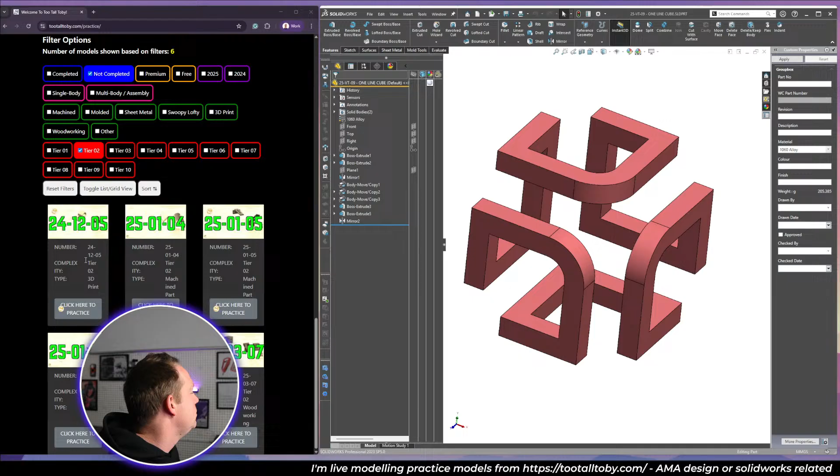Of course, when you're under pressure with time, it's much more difficult. Let me bring up the drawing, and I've got a screenshot here. So I had a go at all of these models as they were - I wasn't watching live, but I did watch it on a replay. And I had a go, and this was definitely one that I was not super quick on. But there's a number of ways to do it. I'm going to take you through my process.

May not be the quickest, but is definitely one way. The quickest way is to do sort of one section on the bottom and the side, and then pattern it, but that can be complicated. So the way I look at this, Gummy, if you're trying to do it in a speed modeling sense in the competition, just try and break it down into the simplest shapes and do it as quickly as possible.

Now, one thing I've noted since then, having a look at it, is you've actually got one side of the model that you could do - so if you see my cursor here, let's say this face. If you do that shape without the radius in it, you could then pattern that or replicate it in 6 different faces, and then just add the fillets to the 3 sides that are closest to you. That is one way of doing it.

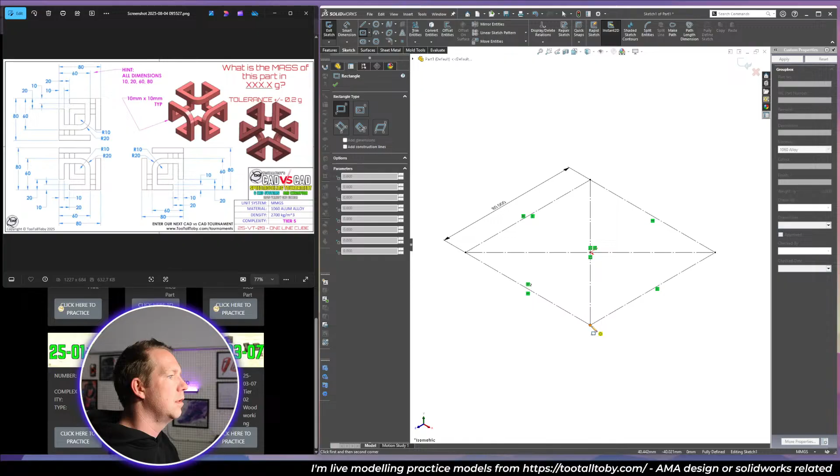One thing I will do is just draw the 80 by 80 square as a guide. I also need to pick a corner that's going to be my back corner. If we go to an isometric view, we can see that this corner here is at the back, which means I'm going to have a 60 by 60 from the front.

And I'm going to offset 10 millimeters, reverse, just to get that size. And then what you can see in the corners is that there's going to be a line here that is 20 mil off this edge.

Because we've drawn these lines, this center point rectangle, we've now got a construction line in the middle. We can use those to mirror elements. I selected the wrong tools there, let me just try that again.

Entities to mirror is this one. I'm going to mirror about this construction line, and then I've got my bottom sketch. Then I can extrude that up, select the contour, and I've got my first solid body.

Now at this point you can start to try and do something fancy with move copy, etc. Or you can just keep going and building, which I'm definitely inclined to do because it's going to be quicker in the end.

So I can then go to this side and do a 60 by 60 on this corner. We'll see how that matches up. And we're going to repeat the process: offset, reverse. All right, now we've got this edge here we can convert.

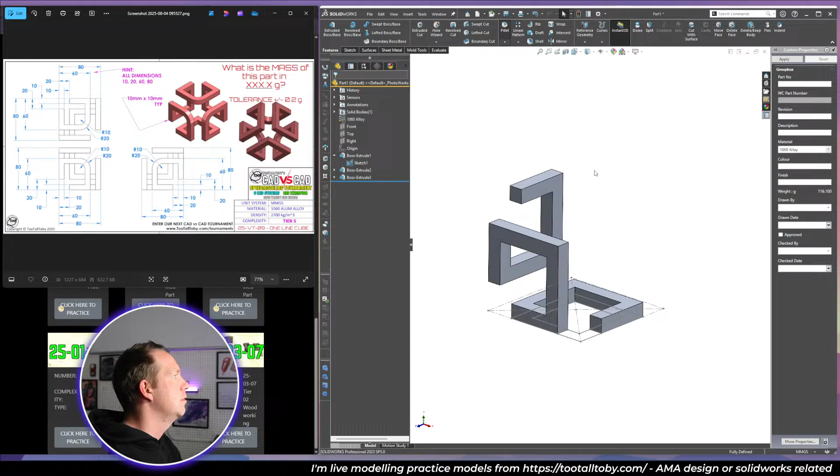Now we've come this far, we can do a fillet. So the internal fillet on this front curve here is 10, and then we repeat that for the outer, 20.

And then we're going to be at this point where we want to mirror. For this, we need a plane that's in between, and we can select mirror, plane, body, merge, and then all we've got left to do is the top shape.

Now your question, can we use thicken of 10 millimeters with inside radius, which makes the sketch simple? Yes, absolutely you could.

So if we went to this one here, you could just do the inside shape and do a thin feature. That is another way of doing it, and probably a lot quicker. As I said, there's going to be multiple ways of doing this one.

60 by 60, for instance, here, let me show you on this one. If we split, let's say I split it here and here. And is it going to join? Yep.

So I make that bit for construction, that bit for construction. So now I've just got this section. I'm going to extrude, I can change that to 10 millimeters. Merge. Okay, and then I've got a complete solid body.

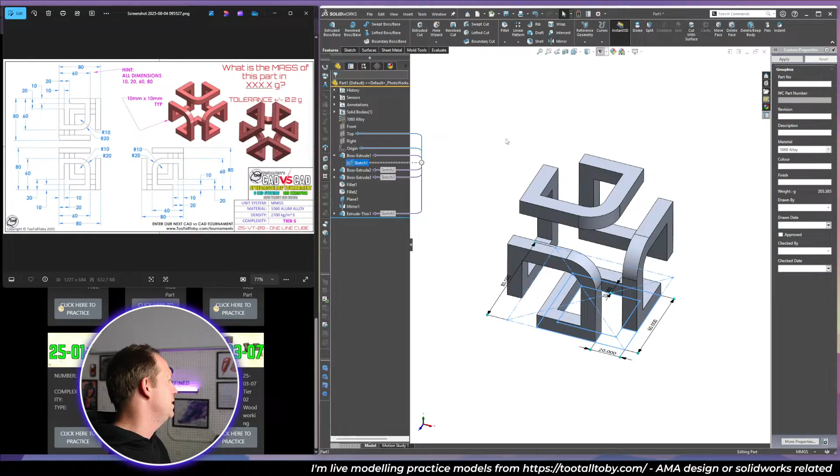Thin feature. Now, this is not, because it's just a model from the weekend's tournament, up as a practice model yet, so we can't go through and record and link a community tutorial or even do a speed run. So I'm going to save that. But yeah, hope you enjoyed seeing at least that sample, that example of one way of creating this model.

I think you're probably right that doing a thin feature will be a lot quicker for the whole thing. And I think, again, doing something that is going to revolve or use a pattern, so you only have to do it once and then you can pattern the whole thing, that's going to be quicker still. But in the heat of a speed modeling challenge, it's very difficult to work that out unless you see it very, very quickly.

Okay, let's move on to some new tier 4 models. There's lots of tier 4 models we haven't done, I've got 35 on the list. So if there were any requests, I'm happy to take them.

But otherwise, let's just start with this one here. 241116, a wall plate. Let's begin and reveal the drawing. So the way we work in this live stream is for all of our models, our first attempt is a practice run, a slow run. We're just trying to work out the best way to do it. After that, we'll come back, make some assessments, and then try to do a speed run afterwards to see if we can get the top time.

This one is plain carbon steel. And this one I have seen before. You'll see in the comments, the pink notes from Toby, it did not finish. I think this was one that I did, and I made some mistakes.

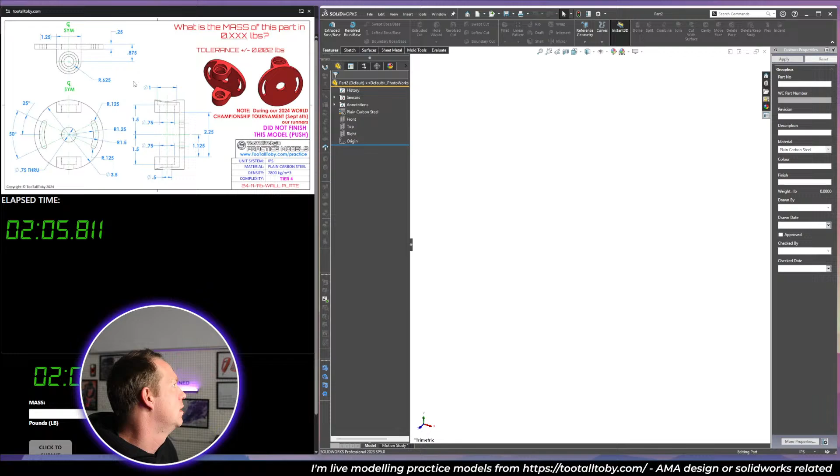All right, so let's have a go at this. Our easiest way to start is from the top, because it's a very simple kind of sketch to start from. You get 3.5 for the outer, 0.75 for the inner hole, and then you can do the slots. Now there's elements of this that you can do in symmetry, but then it's those final holes that need to be done individually. Depends on the prize.

That's very good. What's it going to take? What do you need the prize to be for you to enter? It's more about the prestige, I think.

All right, so the slots. You can do, there's a few ways you can do the slot. A center point arc slot is probably pretty easy to do, something like this. And then I can tweak the dimensions. You can see that the center radius of it, it actually doesn't, it's a bit annoying here. The dimensions don't tell you that radius to the center line, they tell you the two inside and outside. So I can delete that and dimension this one and make that 1.25.

Is that right? Yeah. And then the radius here, well, that is going to be 0.125. And then I want to make this horizontal. I might have to use a construction line for that. Okay, so there's my one slot on one side.

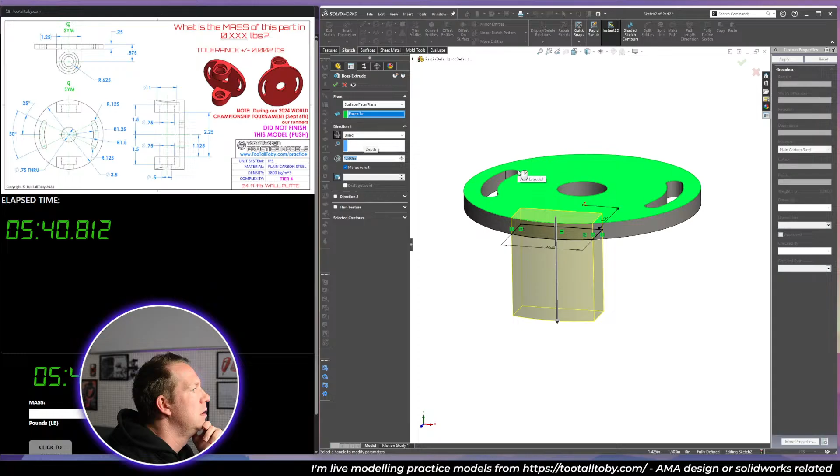And then I'm going to use the measurements that we can see on the top, which is 2.25 between them. So I can go here to here, 2.25 divided by 2, and then the width you can see is 1.25. And then I can extrude this, and the total height, well, the height to the center point is 0.875, but from the top face, and then a radius of 0.625. So if I want to work that out a bit easier, I can start the sketch from there. I can go 0.875, plus 0.625, and that gets my full height.

And then on this point, a very easy way to do this is a full face fillet to get the round shape.

Now, if I try and mirror this feature and that face, that works fine, so that step is okay. And then we have to do our holes. So there's a few ways we could do the holes.

The easiest way is just a couple of cut extrudes. I'm inclined to do a revolve cut so we can do the whole thing in one go. So what that means,

I'm going to draw a line in the middle, which is a construction line. And then I'm going to look at the holes, looking at this side view, and I'm going to say we're going to have one that comes to the edge. It's going to start quite skinny, come in and then get wider all the way through. And they're the same, 0.75. And that comes out, gets wider still, comes in, back to the middle, join all the way up.

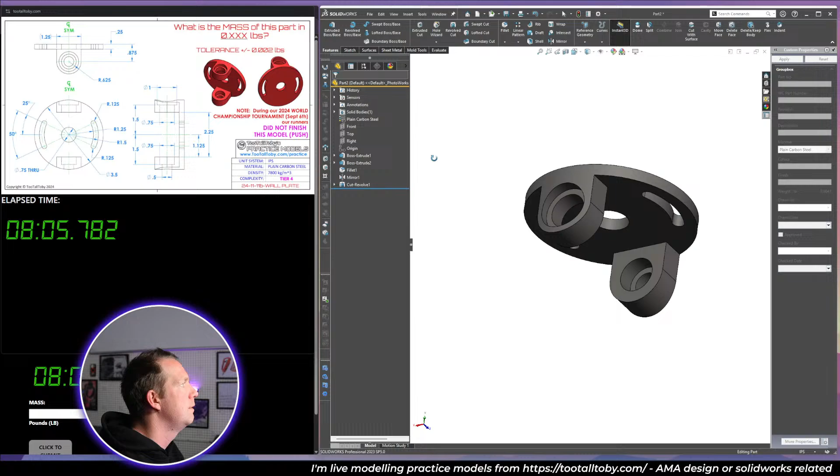And then the depth, you can see that from here to here is 1.5. And here to here is 1.5. With that shape done, I can then do a revolve cut to remove all of that in one go. And if I've got it correct, then this should be the answer, 0.904. There we go.

All right, submit that time. And we'll save the model. This is a practice model. Wall plate. It is red.

What did you guys think of that workflow? I think there's a few things that we can definitely tidy up. I think the color's a bit light, a bit dark. All right, let's

Let's see what we could do better now. Or let's have a look at if I've got the file from my World Champs entry. It should be here. It's called a wall plate. You can see that one.

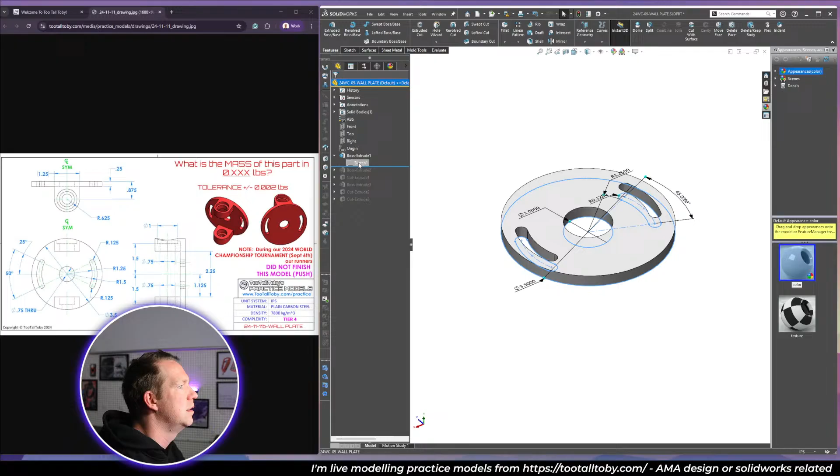So what I'm opening here is the first time I built this. And you can see the method I used when I was doing it live the first time was very, very similar. I did the outer shape, extrude, and then I did one shape here. I did this one differently. I did it from the center and extruded out. And I put that 0.5 mil hole in there. Not sure if that's the right way to do it, but then I did a cut going through.

This could be pretty quick, which could be very quick. Probably quicker than sketching the revolve cut. There's a number of holes, a number of things you need to select. But that can all be driven from one sketch if I put the other holes inside it. So I think that might be a good way of doing it. And I think on the top, I think doing all that in one sketch and just mirroring the sketch is going to be pretty quick too.

So let's just tweak our model to get to that level. So we're duplicating the process, which means I'm going to scrap these elements and go back to the front view and scrap that one. So I'm going front and then I'm sketching.

We could do a slot, that will be pretty quick. So I want to do a slot for this section. That way I can put these dimensions in very quickly. Can also select and convert that edge. And then we want to put our holes in. Now for our holes, we've got 0.5, 0.75, and 1. So that's the sketch we need to do.

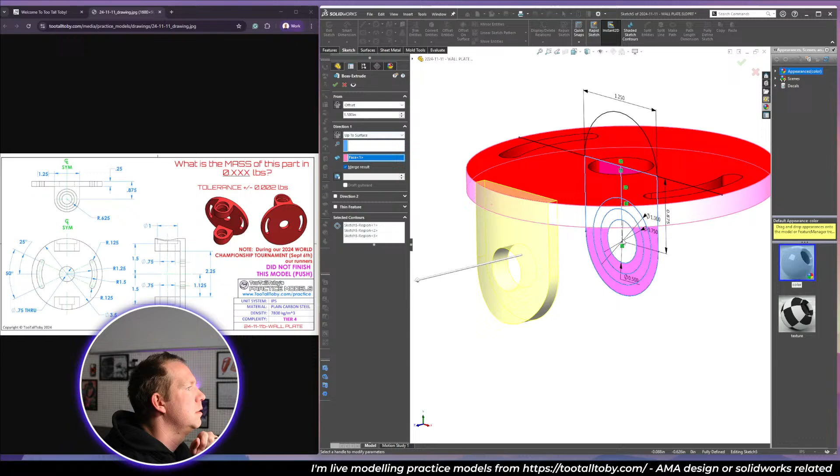And then I'm going to do an extrude. I'm going to select those 3 contours. I need to go offset 1.5, and I want to go up to surface. And something's gone wrong there. Yeah, it's offset not 1.5, it is 1.125. So we do it like that. That's one way.

Then we want to do the same the other way, except we're going to select some different contours. Just going to select those 2. Offset up to surface this way. Flick that direction. And you can see I've done a bigger hole on that side.

And so then we need to do 2 cuts. So this is more complicated, but if you're quick enough at putting and getting the correct dimensions in, it should be quicker. Need to select both those contours. Now, have I got them right? Got 0.5 and then I've got 1. That's not correct. I need a 0.5 and a 0.75. So I just selected 1 contour too many.

So it should look like that. And then on the other side, I need to do the biggest one. Offset 1.5.

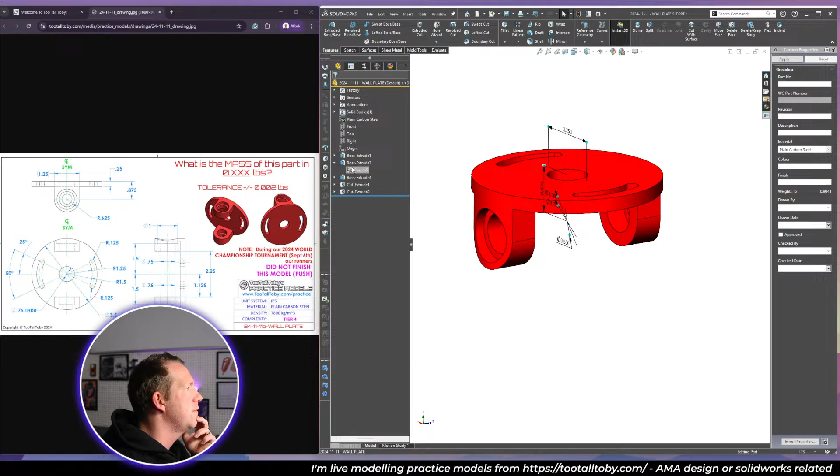But I don't know about you, I feel like the sketch is quick, but the process is going to be slow. Anyway, let's give it a go.

We'll see the time to beat. Time to beat is 3 minutes 30. Gummy, you're up there, mate, 4 minutes, not bad. Rich Pan and Matab. Oh, let's beat that.

All right, so it's plain carbon steel, pounds. Start our file, we're going to try again, and here we go for a speed run. 3, 2, 1, and let's go.

All right, top. 3.75, and then our slot. Now I didn't do arc slot, which maybe I should have. I just wanted to dimension the internal one, which was 1.25. This one being 0.25, and I feel like I've done something wrong here. The outer side is 3.5. That's what I did wrong.

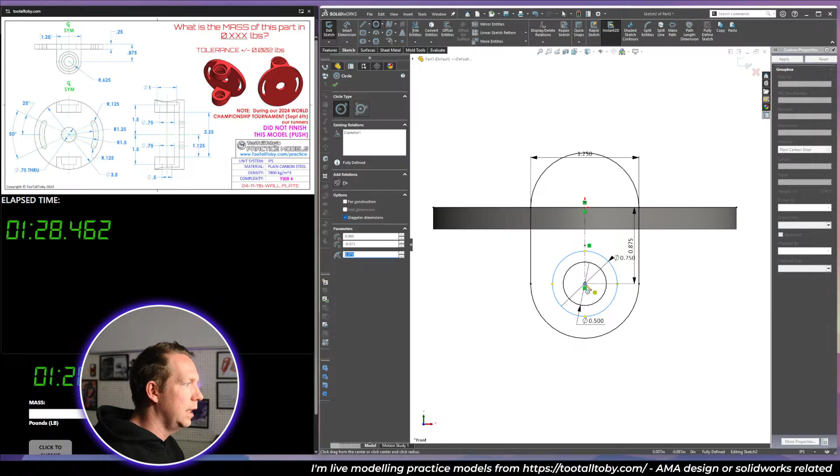Click that, and done. Then I've got to get my cuts in. So this one has small cut on the outside, big cut inside. I'm selecting these ones, and going blind 1.5. Okay, and then I'm doing the second one. I'm going to select all those contours through all, offset 1.5.

And I've got something wrong. What's wrong here? And this is going to slow me down. Small hole, that one's too big. So I selected one more contour than I needed to on that one. That's the trick.

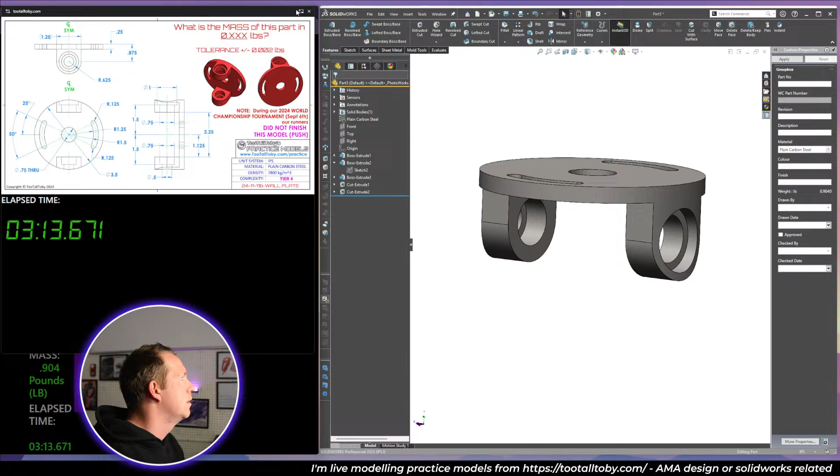904. 3 minutes 13. Sketch, extrude, revolve. Yeah, all right. I think we've got the quickest time, but it wasn't that fast, and I dare say a lot of you guys could probably beat that.

But we'll move on, don't love this model, but it's okay. How'd you guys go? Anyone do a good time on that one? Love to see you beat me in the times there. Let's jump on to the next one.

Back to practice models, and we go down to not completed. Let's do a tier 5 where there's 22 models we haven't done. That's plenty. And let's pick a woodworking one, something different.

Rich Penn had done a video, speed modeling. Let's give it a go. All right, red oak, inches. Annoying, multi-body part, it's quite a bit of detail on this.

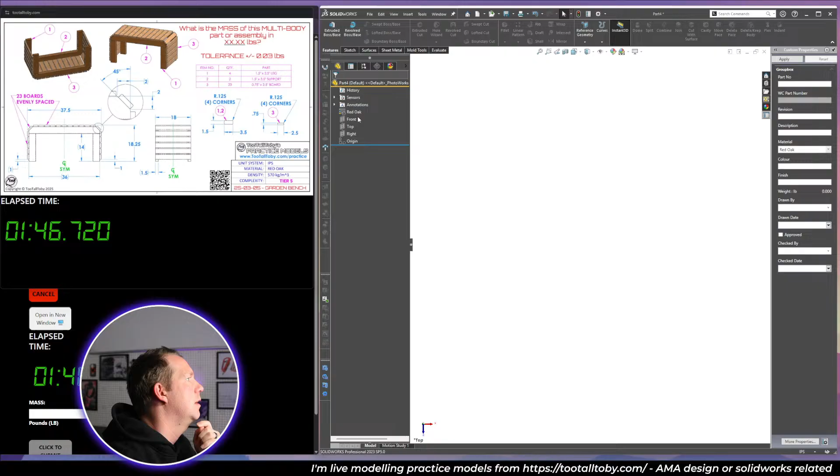I'll probably start from the center out. So I do the height to the timber leg, because I want to do the frame first and then do the multi-body like planks afterwards. But we can see we've got the dimensions. It says 18.25 to the very top.

The boards are all the same thickness, so I could actually do the inside, which is 14. And then the width, 36 minus 3.5, 18 minus 3.5. That's the inside shape.

So I could just do that. Then I could extrude and do a thin feature and do it blind. Now the thickness is 1.5. The width is 3.5. And we want to offset it.

18 and then come in. Yeah, doing it a quarter, that's the way I'm thinking of doing it here. Right, so we get that corner section done. And then we can do that chamfer, and the chamfer we can see is 2 by 2. So I can select that edge, do a chamfer, make it 2. That section's done.

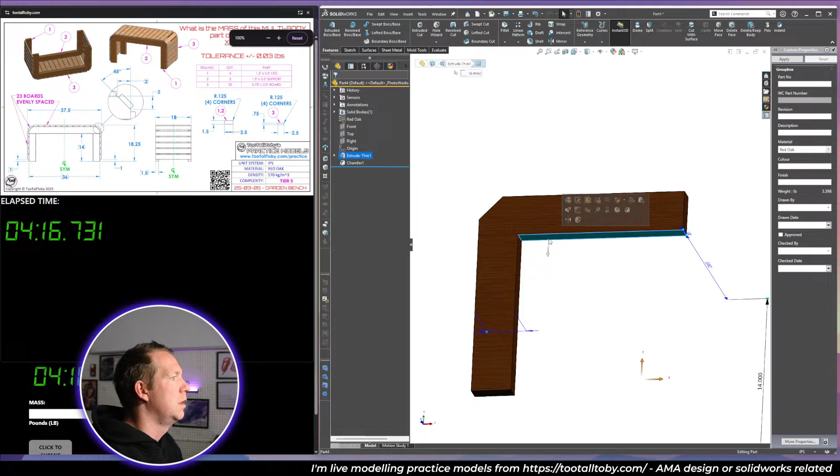So in fact, you do need to separate them. In which case, I would split, cut, separate, and then put some fillets in. The corners are 0.125. And I just select all 4 like this. Okay, and then repeat it on this one.

I'm not sure if there's fillets on these edges. It's not really clear in the drawing. I don't think there is. Because if you assume, like the way it's made in woodworking, you have a plank, it's cut on this face, it's cut on this face and this face. You don't then have the same fillets on those edges.

All right, so with that done, now we can do the boards. Now this is the point where there's probably some ways to save time. And there's one board that sits right in the middle. So you want to come up here and draw that board, which is going to be 0.75 by 2.5.

And I want to get this one right in line with the origin. And I can put the fillets in at this point, just like that. And then I can extrude it up to the front plane, and that's going to be halfway. Uncheck merge, and then I've got one plank.

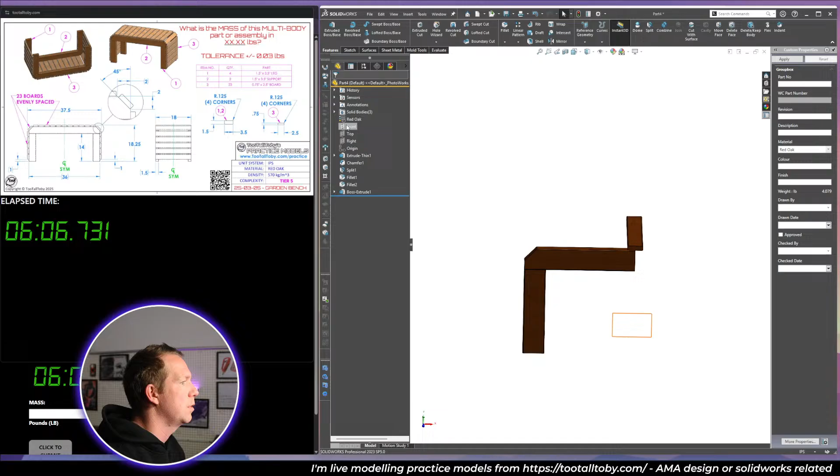So what I'm going to do is come here, draw a sketch that comes around and down, and finishes 1 mil off from the bottom. I'm going to select that to do a curve-driven pattern.

One tangential, might not want to do it. I might have to convert it to a curve, then try curve-driven pattern, and then it must be tangential. All right, so let's delete that, edit the sketch. Let's put a radius in on these corners, see if this helps.

Body, selected point. No, it's not going to be a sketch-driven pattern. Curve, equals spacing, bodies, this one. Don't think this is going to work. There's definitely a setting that I'm doing wrong here. Transform alignment method, align to seed, tangent to curve, face normal.

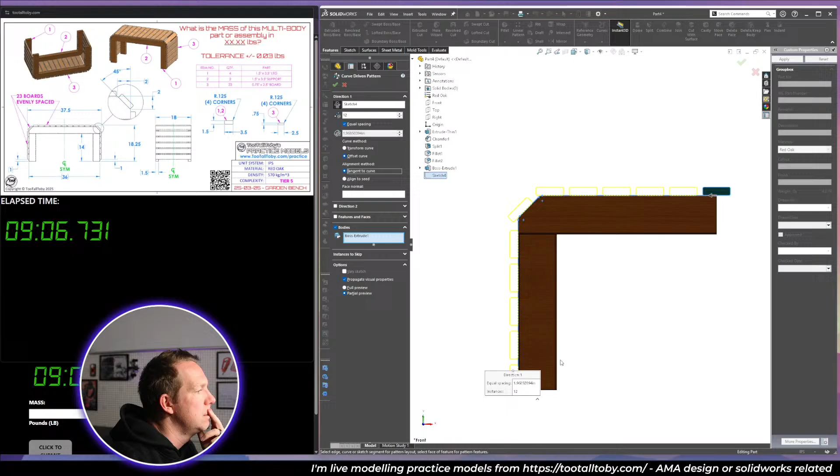Offset curve, transform curve, offset. Align to seed, tangent curve. This will give the correct answer, but the model's not right.

Hey Matab, welcome. You've only missed one model, or 1.5. We've started at tier 4 models, so not much to miss out on.

One of the issues here is that we probably want to do all the mirrors before we do this, because trying now to mirror all of these bodies is going to take a lot of time. We're probably better off doing this and then mirroring.

What am I going to, front and right? Let me try that again. We want to do a mirror, right plane mirror, and then select the front as well. Body's going to be these two, and we're definitely too wide.

18, that should be 9. Okay, so if we get those bodies done first, then we can do our extrude, and for this one we just extrude all the way across. I'm going to save us time. Then we do our pattern. Then we could mirror those bodies.

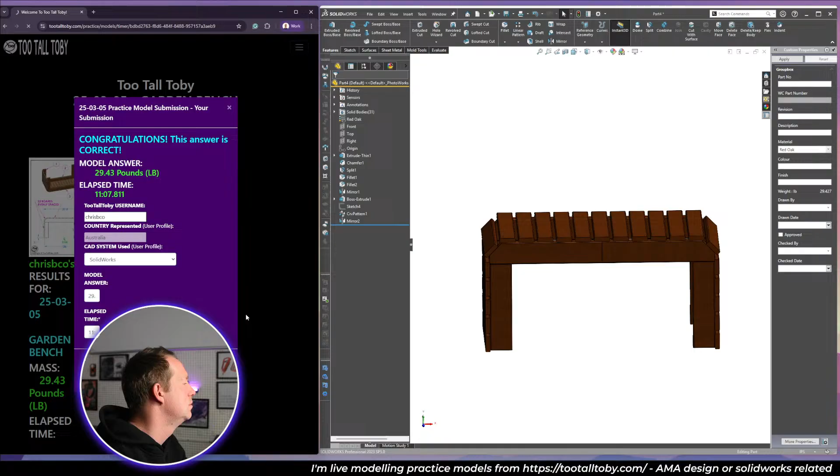Practice models. Matab, congratulations on making it to the final. I thought you might be here for practice, and you sharpen up those skills for the tier 5 and tier 6 models that you're going to see in the final, I reckon. Yeah, pretty exciting. Well done.

All right, so how do we fix this? Let's just have a look at the drawing again. So we know that our frame is correct. It's all about getting the right position for these legs.

I suspect that if we change our sketch, notice here the sketch is going to the center point of that body. So if we reduce this dimension by half the length of that one on the right, and add another 1.25 to it, that's now going to space it exactly where we need to. So it's going to be one inch from the bottom. And now that positions this one correctly.

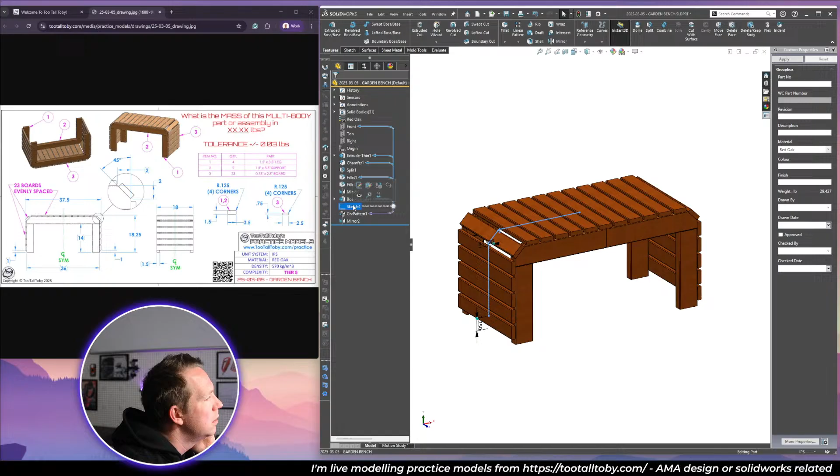Rambros, do a sketch pattern for the planks. Yeah, you could do a sketch pattern, but is it going to be quicker? Maybe. Depends. Like this sketch is pretty fast here. I do a sketch, I do a curve pattern, I mirror, and I'm done.

Let's see, let's give it a go speed modeling. So we did 14 by 14.5, chamfer that edge, split, fillet, mirror, double mirror, and then extrude and pattern. All right, Matab, I'll have a look after this.

All right, let's give this one a speed run. Our target time is 4 minutes 20. Logged out. Yeah, okay, could definitely be quicker in Fusion.

Where is our model? We just did completed and tier 4. That was tier 5 actually. This one. We're going to try again.

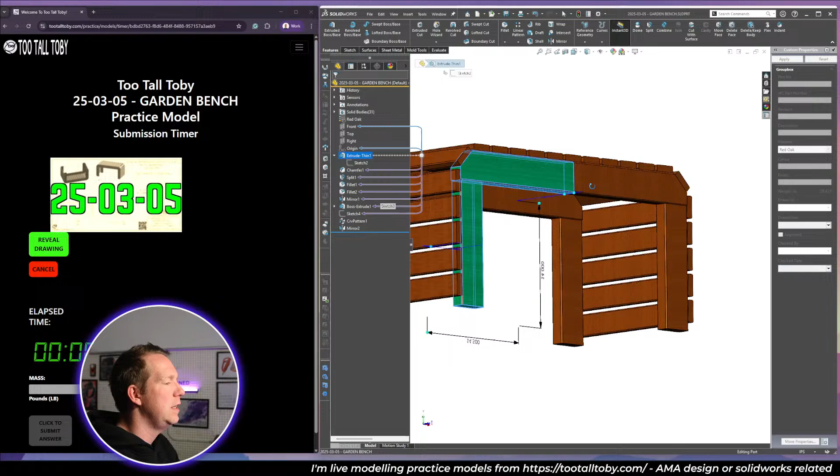And 14 up, 14.5 to the side, 9 out, 1.5 in. Let's give it a go. Inches, red oak to start. 3, 2, 1, let's go.

14, 14.5. Make those two construction. Extrude this. What was the thickness? 3.5. We're going blind, 1.5. We're offsetting it, 9. Make sure we're going the right direction. And we are going to the outside.

Okay, chamfer, edge of 2. Split the bodies, cut that, add our fillets. Fillets are 0.125. We want to get those 4 edges. We want to repeat the tool, select those 4 edges. Then we want to mirror.

So we're going to go right plane, mirror. Secondary plane being the front plane, bodies, these ones, okay. Front plane, sketch, rectangle. This is going to be 0.75 by 2.5.

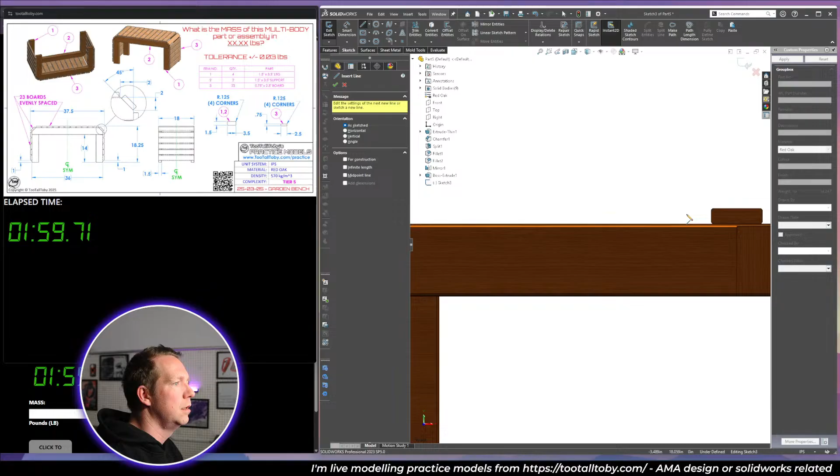I'm drawing a sketch that comes across, down, and down. This is going to be 1 plus 1.25, and I need to fillet those edges there. Select that sketch, use curve driven pattern, select the body, check the direction, press OK, mirror, bodies, 1, 2, 3.

Answer, 29.43. Oof. 2.42, 2 minutes 42 with a few mistakes. Probably could get around 2 minutes 20, I think.

Yeah, sorry, you're right, it is hard. I should probably lighten it. So what I can do is open up my red oak file and turn on the lights, which I've done in this one. In my millimeters version, I've already brightened it. I just need to do the same thing in the inches one, so I open up the inches template, turn on the extra lights, and then just save as a part template again.

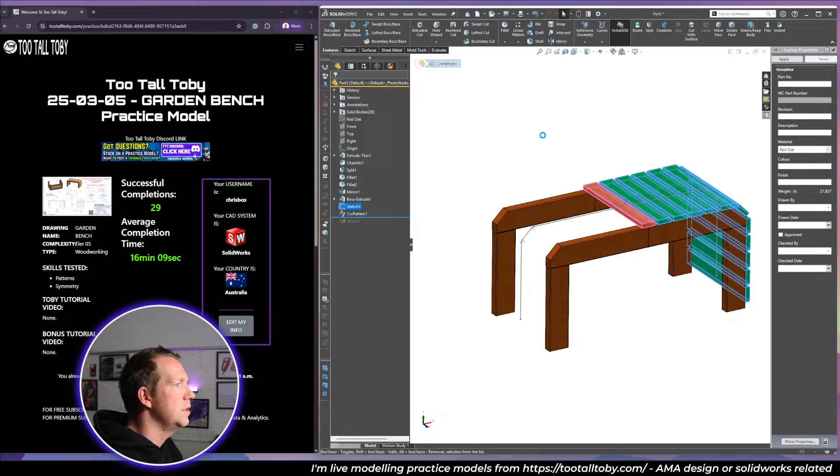I'm just curious to see if this sketch, if we could do this sketch both ways. Let me just turn the lights on. So this sketch here, if I could make this sketch go all the way on both sides, I wonder if I could do this pattern so it was going both directions.

I don't know if I can. No, it doesn't want to do it. I think maybe if I converted it to a curve. So let's try that. So I get my sketch, convert it to a curve.

Now select that curve, do curve driven pattern, select the body, direction 2. No, it's still not going to work. There's probably a way to do it so it'll pattern both sides at once.

I guess maybe you can mirror. I only do half the mirror of this, not double it, because then I'm doing mirror twice. All in all, it's pretty quick. Now we go to number 1.

2 minutes, nearly 2 minutes quicker than Rich. Nice. All right, Matab, you had a request.

Matab's request: equal spacing. I did have equal spacing. So, yeah, equal spacing is ticked.

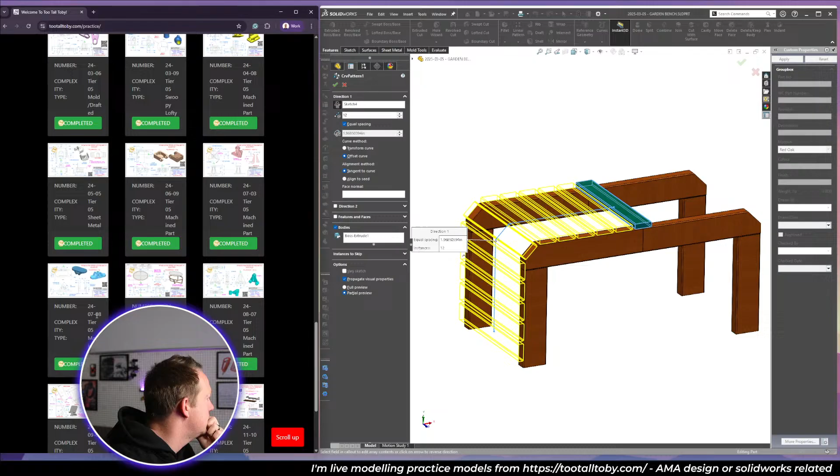Well, mirror that path sketch and equal spacing maybe. No, I tried that, didn't work. Tier 4, okay.

241207, this one. Cool, I haven't done it. So let's have a look. Machined part, very hard, tier 4, very hard, okay. Let's give it a go. Top 100, 2 minutes 54.

All right, here's the hard model. What's hard about it? Apart from it being in inches. Oh, the bends. Yeah, I can see the bends being tricky, but okay. Good challenge. Thank you.

Let's jump into an inches aluminium file. Now I would do all the flat section first. And I'd start with the circle, always start with the circle.

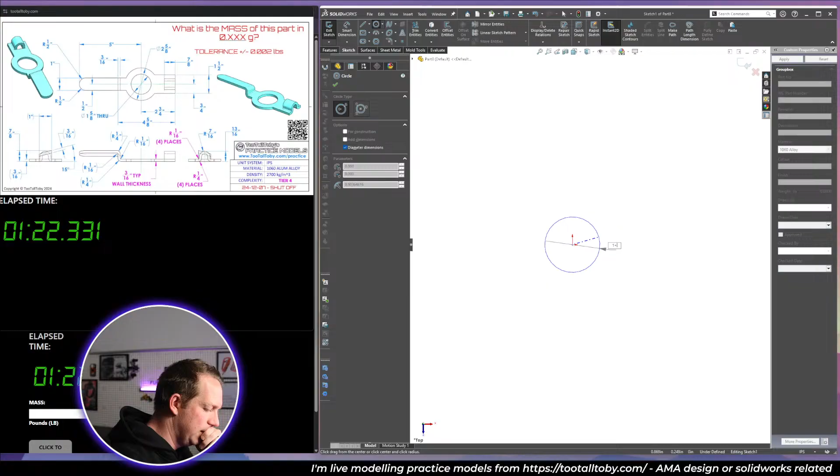1 5/8. Oh man. Why do that, Toby? This is why it's hard. One plus 5 divided by 8. So annoying. And then on the outside, 2 plus 5 divided by 8. That's so annoying.

We do a rectangle like this, just to there, and then we do another one. It's bigger to here. And I'm going to grab those two and make them for construction.

And we're going to say that from the center point to the end is 2.75, and the width is 1.5. The width of this section is 1.

See you around, bros. Thanks for stopping by. Catch you soon.

All right, 1 for that. And then from here to here, the dimensions we've got is 4 plus 5 over 8. Okay, so that's the shape at the bottom.

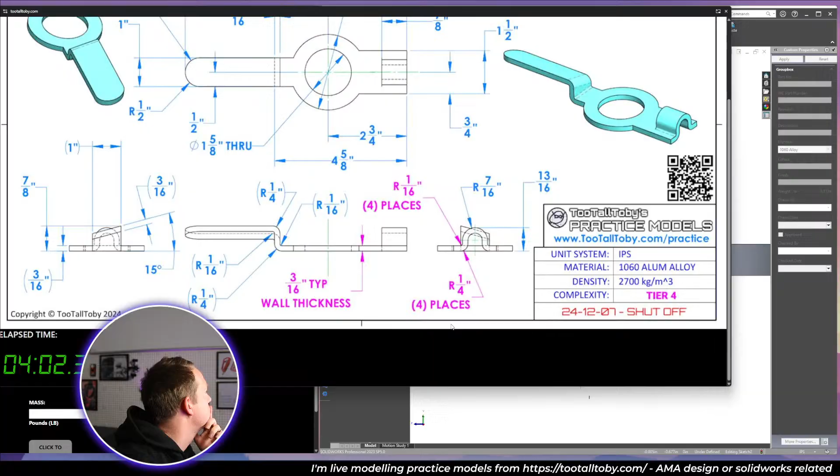Let me just zoom in a bit. That radius comes right to the edge. So it's a 1/16 plus. So it's 2/16, so it's 9/16 wide. There we go.

So we can go like this, midpoint, origin, coincident, and 9 divided by 16. And we can extrude cut that.

Line 7 divided by 8. Is that right? Don't know if that's quite right. Doesn't look right. Definitely complicated due to the twist.

That number didn't work. 9/16 is correct, but that's the radius. That's what I've done wrong. So the diameter is 14/16 plus 2, so 16/16. It is 1. The slot is 1. Okay. My bad. So it's like that.

Looks longer. Well, I haven't done that section yet, I'm going to do that separately. What I'm doing right now is this, because what I want to do is... let me explain.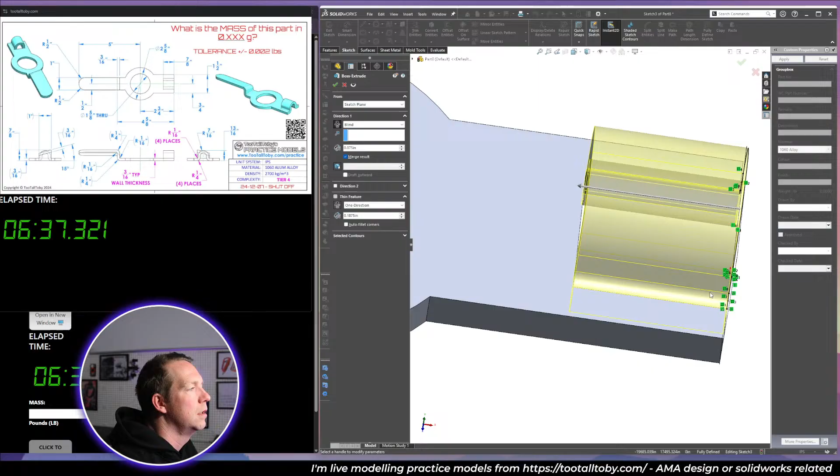I'm going to mirror these two sections and trim. And then I'm going to extrude with my thickness being 3 divided by 16, and going up like this to create that curved section on the end.

Right, so now we've done that whole right section of the model. Now we do the left side, the side with the twist. So the side with the twist, the views that we've got, well, we can see it slopes.

If I go to the left side here and I look at this view here, these are the dimensions I'm going to use. Because it starts up and it just goes and stops at a point, and then we extrude it down, and it should be pretty straightforward after that.

I think the hardest bit on this one is understanding the geometry and how to build it. The tools that we're using are not that difficult. So...

We can start on this face. Actually, we can do a sketch on the right plane. Just want to make sure I get it facing the right way. And I'm going to sketch the shape that it needs to be, just like that.

The width is in line with these, and the width there is... no, it is 3 divided by 16. The angle is 15. The height to this one is 7/8. And then I'm going to extrude this.

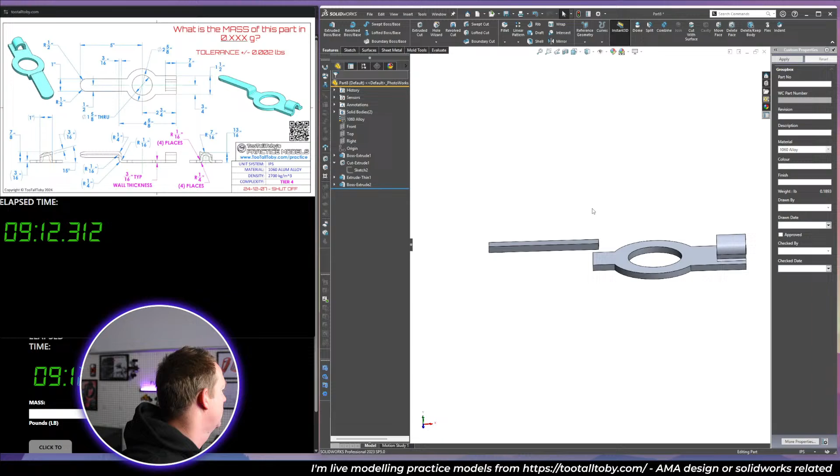Right, and as you can see, once I've got that side done, well, we've got a full round fillet here. Delete. Oh, it doesn't want to do it. Does not want to do the full round fillet. That's fine, we'll try a normal one.

Okay, and then here all we got to do is just fill in the gap. So I'm going to sketch here to here, and extrude up to surface. And now it's all merged together, and then I just need to put some radiuses in.

We've got 0.25 on the outside, and let's just say 1 divided by 16, 0.0625 on the insides. Let's see if we're correct. 191, there we go, that's our answer. 0.191.

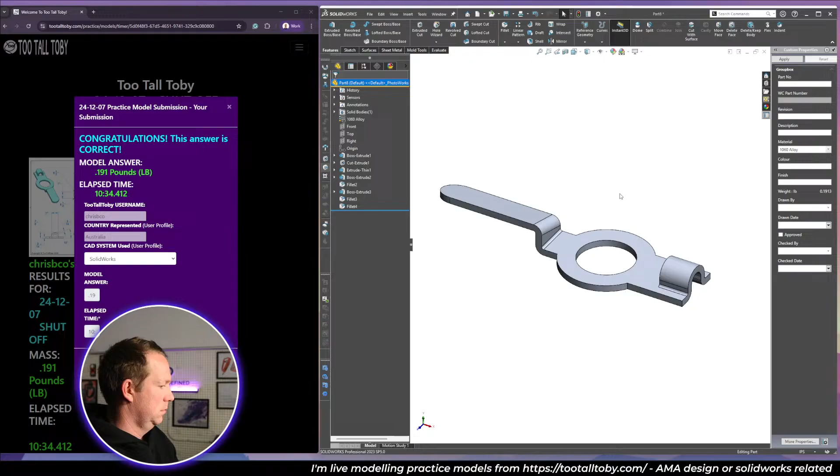First attempt, which is good, and we can work on the speed. Let's save.

What's it called? Shut off.

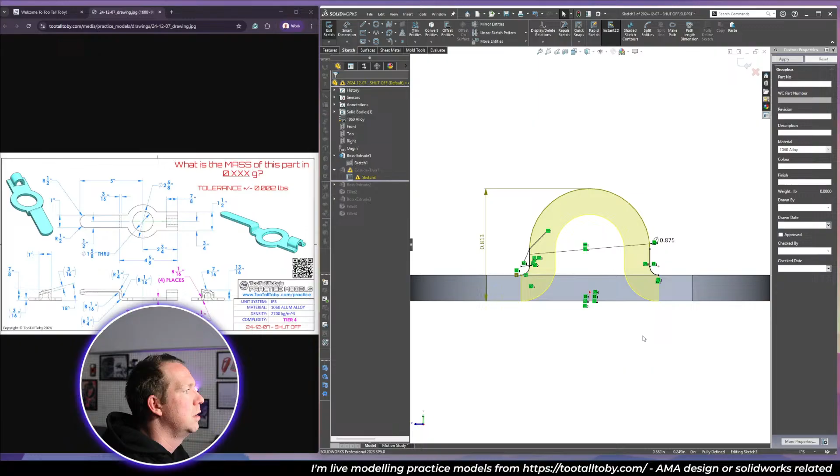And I put in these edges and give that a dimension, like that, and go the other direction. Is that the same thing? I think so.

So that saves us that cutaway material, add-on material again. It's a little bit different, but I think that works. Everything else then stays the same. 0.191 was the answer, so that's still pretty good.

This section here, I think it's the quickest way. Yeah, you got to do fillets twice, 3 rounds of fillets. The reason the full round fillet doesn't quite work is because these faces are not perpendicular. I think it doesn't like that.

And that's close enough.

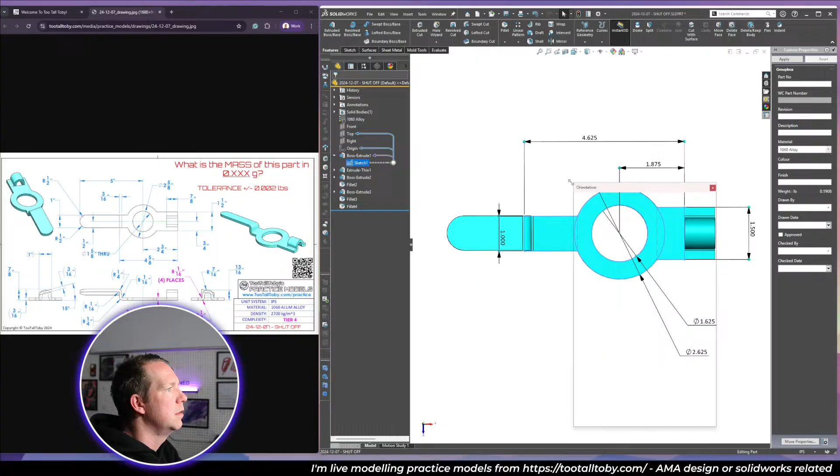All right, so the hardest thing here is the numbers. I don't like working in fractions, but that 1.875 is important. What I want to do is take this screenshot and I could replace some of the numbers. Actually, I'm just going to take a screenshot of this one and put it up on my screen so I can use that as reference for my first sketch. Everything else I'll just kind of wing it.

All right, so top speed 2 minutes 54 - that's the time to beat. Let's give it a go. Okay, new file, it is pounds and alloy. 3, 2, 1, let's go.

So top, inner hole 1.625, outer 2.625, rectangle, it's 1, and I'll do the other side first. That is 1.5, 1.875, 4.625. We want these to be equal. We want these to be equal.

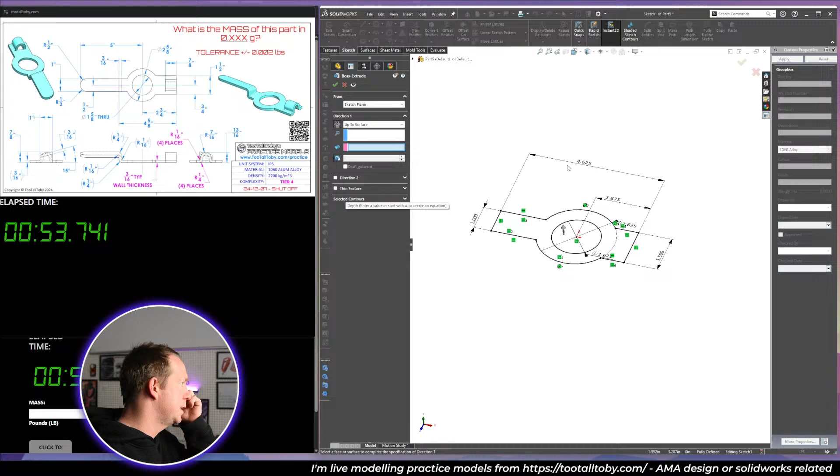May as well trim away these sections because I can. And then I'm going to extrude up. The thickness is 3 divided by 16. Okay.

Then we're going to do the sketch on this side. So I'm going to do line, radius, straight, radius, select it all. Select right plane and mirror - actually front plane and mirror. Make that tangent. Give that a radius of 7/16. Give that a radius of 1/16. Make it tangent.

Do the height - 13/16. Extrude. Flip that to 3/16. Flip direction. I think we said that's 7/8.

Okay, that's that side. Then the other side, right plane, just flip around. Line, line. Probably could do this quicker, but going to get that vertical. Get those parallel. Get the angle right. Get the height right - just 7/8. And that one, thickness, use 3/16.

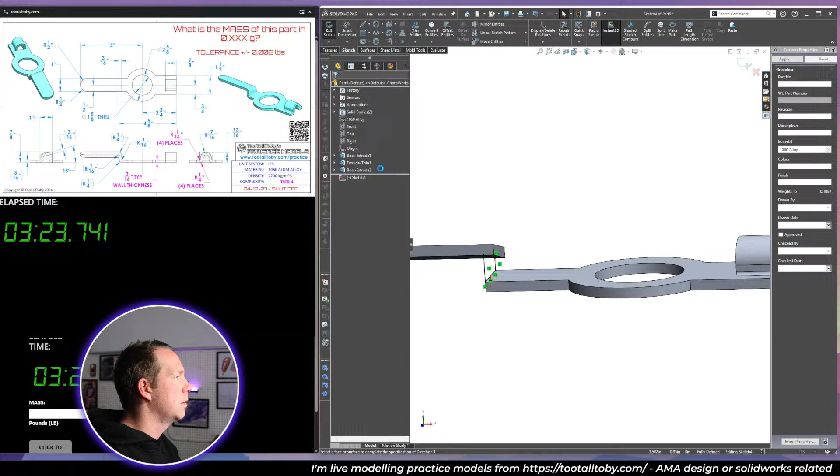Then I want to merge them. So I'm just going to come in here. Yeah, this edge up. Merge up to surface.

Now fillets - we've got our fillets, where are they? 1/16 for the interiors, not that one, it's this one, and then 1/4 - so it's a 1/4 inch for outside, and then 0.5 for these two.

A bit slow in the end, 0.191. Yeah, that's still slow. It's still really slow, only third. This is very tricky, so I reckon those guys will probably do that quicker. But they don't have a video of it, so I can't reference.

Yeah, but very yucky model, didn't like it at all. Just the numbers - numbers were not good. Let's try another one. If anyone out there has any requests, happy to take them for the next one.

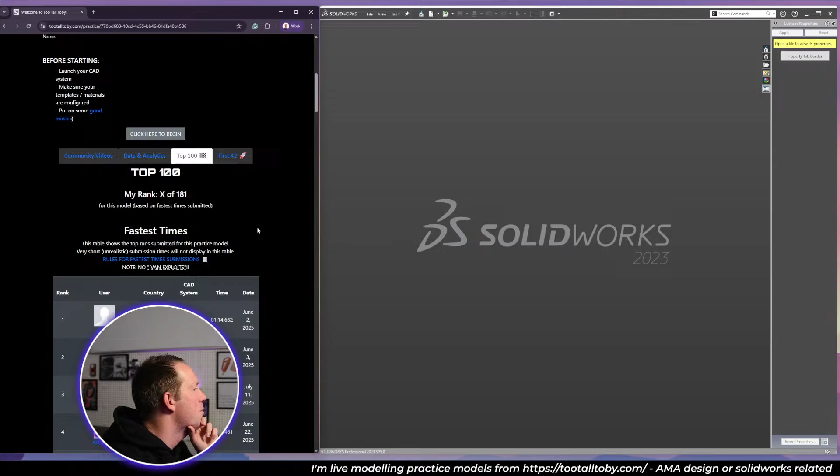Okay. Oh, I've done this one - bath caddy. I've already done it. Just not here - where have I done it? Because I've definitely seen it. Step file, why do I have a step file? Here.

It was done for an earlier competition this year. Multi-body and patterns.

It's in millimeters, so we'll give it a go. It uses patterns, it uses some paths. So yeah, let's get into it. It is millimeters various, which means pick one of the materials and use it. I'll use aluminium alloy.

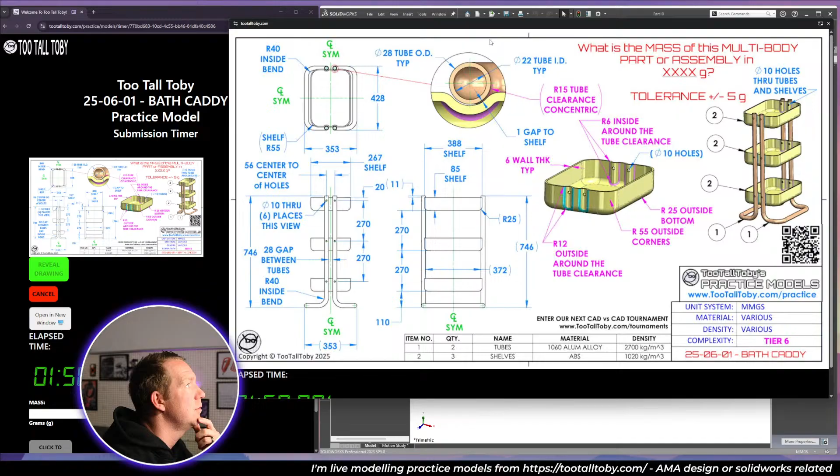And in this example, you want to create the holes before you create the shelves, the tubes. The reason you want to do that is because of this detail here, where you have the clearance around the tubes - it's a 1 millimeter gap. You can use the tubes to indent into the face of the shelf before you shell it to create that cut detail. Makes it very easy, very quick. So we'll go through that process.

The thing you need to start with is the tube. I'm going to start on the front plane. And for the tube, you've got the OD and the ID. If we can create a path for the tube, then we can do the whole tube in one go, at least a quarter of it.

So to do a quarter of it, we want to get a sketch which looks like this - it's going to be a solid body though, sorry, let me just draw that again. So we're going to do a rectangle. I will show you the trick that I'm starting to use to do these sort of tubes in a very quick way. I think it's really quick anyway, quicker than doing a 3D sketch. It's actually doing a 3D shape, adding your fillets in, and then using that edge.

You need to do a bit of maths to work it out though. The full height of this is 746. But I need to take off the radius of the tube, which is 14. So I want to go all the way up 746 minus 14. That's my height. Is that correct?

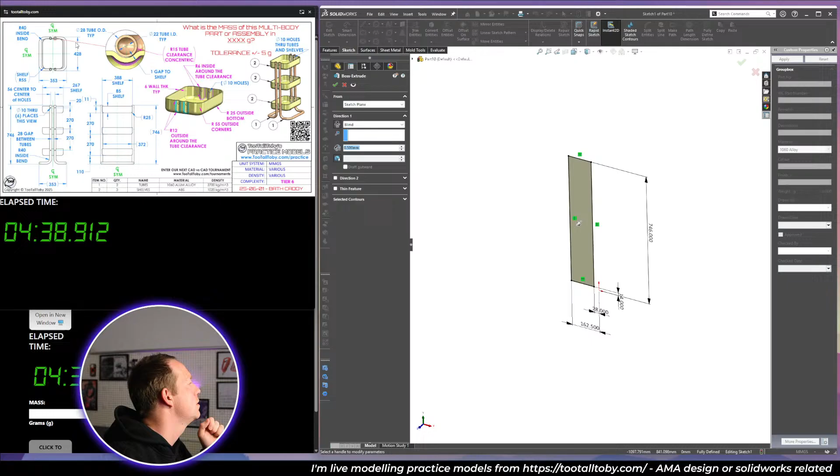All right, bear with me while I try and explain this one. Now we're going to extrude this body half of the full width. So we're going to go, it's 428 divided by 2, and then we're going to take off the radius again, so minus 14. So we're going 200.

Now I'll just show you these planes so we understand where we're at. We've done this quarter.

And we're going to do a radius on this edge, which is going to be the internal radius of the tube. Now we can see here, the top view, it's got an inside bend of 40. We're going to add our radius to that. Our radius of the circle, which is 14, which makes this 54, if I've done it correctly. And then we've got this edge here, we're going to grab, and that has the same radius. So we could actually do that in one fillet.

All right, we're nearly there, Matab. I could, looking at this now, I'm actually going to do both ways. So I'm going to go mid-plane 400. And I'm going to put all the fillets on. I'm not going to do a quarter, I'm going to do a half, because it's going to make it fast.

Now, here's the bit that's going to melt the brain. I'm going to right-click this edge and select tangency. You can see that selection that I've got now, that is the shape of our tubes, if I've done all the dimensions correctly.

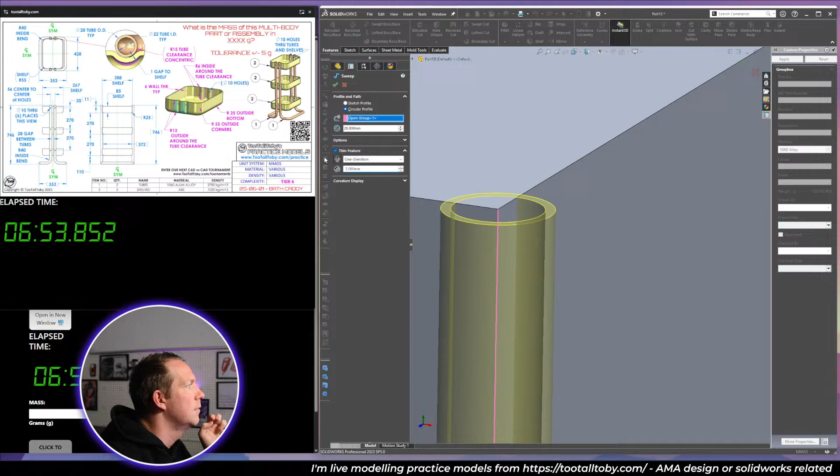Now unfortunately I can't select that edge and then press sweep boss base. I have to press the sweep. I have to go circular profile. I have to right click here and select tangency. And that's stopped. Let me try that again. Selection manager, tangency. Okay, I'm going to put the outer dimension in. I'm going to do thin feature, and you see the thickness is 3 millimeters. So I want to make sure I'm going to the inside, and I uncheck merge result. And there's my tube.

Now I want to check if I've got the right dimensions. All right, so from the front plane, outside to outside should be 353. Let me just mirror quickly, because then we can do some dimensions. So from here, we want from there to there to be 353, which you can see we've got correct.

I also wanted the bottom edge of these to be on the top plane, which it is. You can see I've got that right. And then from the top view, I want from edge to edge to be 428, which it is.

This could be the thing that gets you over the line in the finals, Matab. Could you imagine?

Okay, so that's everything you need for the tubes. That's it. In one body. Yeah, a lot of maths in the head, but it's quick.

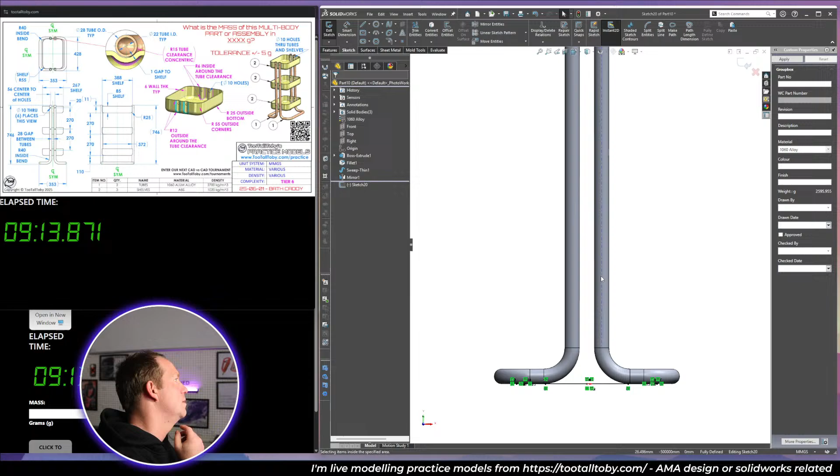And then each shelf has a height, just looking for the dimension, of 85. And then the bottom one is offset 110. Like that. So uncheck merge result, very important.

Now we want to put the bottom radius on. So we've got R55 there. The bottom radius is 25, so we'll put that one in.

And then we want to do our indent. Now the indent one is important. So for indent, our target body is the shelf. Our tool body is the two tubes. We're going to hit cut, and we're going to offset it by 1 millimeter.

Now it's going to cut inside and outside of the tube, but you can see here it's going to leave a bit of material left. So when we press OK, there's a few extra bodies that you need to get rid of.

Now there is an alternative to get rid of this, which is to do a swept cut, but I think this is quicker.

Now you don't actually have to delete the bodies, you just have to hide them. Anything that's hidden is not included in your maths. If you look at the weight over on the side here, 25209, if I hide this big body, it goes right down. So you don't have to delete the bodies, you just have to hide them.

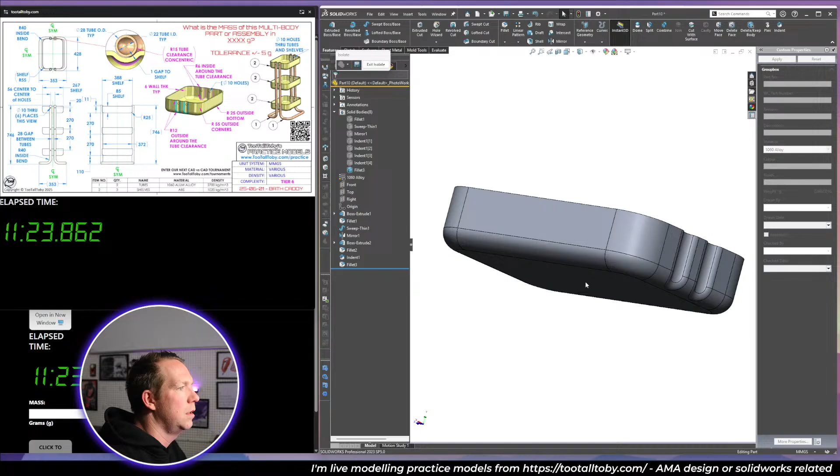And then the last step is the shell. And it's a 6 mil thickness. So I click and remove. Exit isolate.

Now we can pattern. There's a few ways of doing the pattern. I still like to use a linear pattern with the body. And my spacing is, I'm going to do 3, and it's going to go 270.

And then on my front plane, I want to do my holes. And the holes, I can see a 270 part. If I do the top one first, so it comes down, it's coming 20 down from the edge of the shelf, which makes it difficult. So I want to go from here down 20, and then put the hole in, which holes are 10.

I'm going to mirror, and then I'm going to pattern that one. Similar thing, except I want to go Y, 270. And I'm going to go extrude cut through through everything.

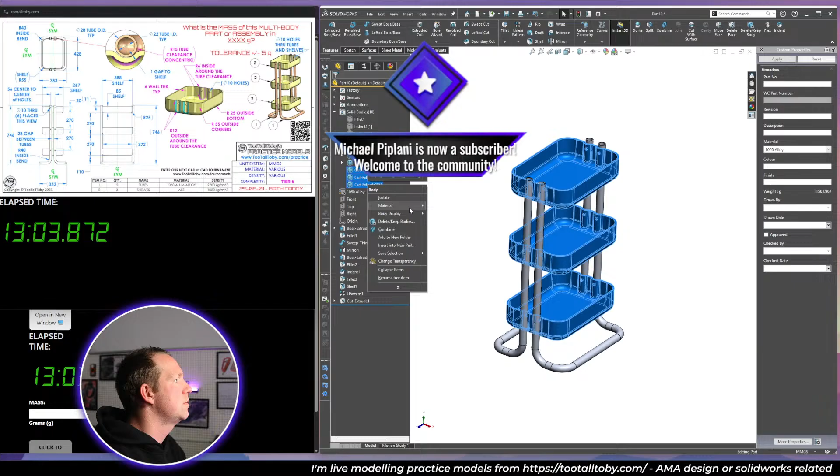Then we have those materials there, shelves, ABS.

And so then we should have our answer, which would be 5973. Let's check it out. We're done.

Oh, that is a tricky one. Lots of features, Tier 6 model. I think we've done well to get that right first time. There's a lot of places in this you can obviously go wrong with the dimensions, the way it's set up. Yeah.

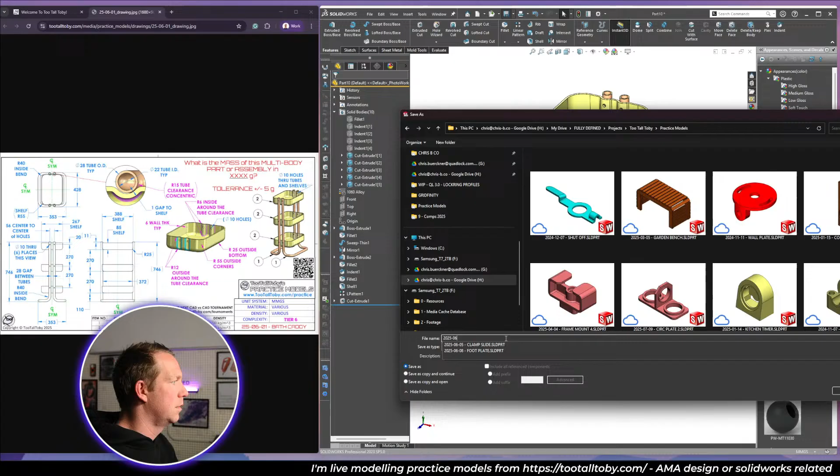And should we do a speed run?

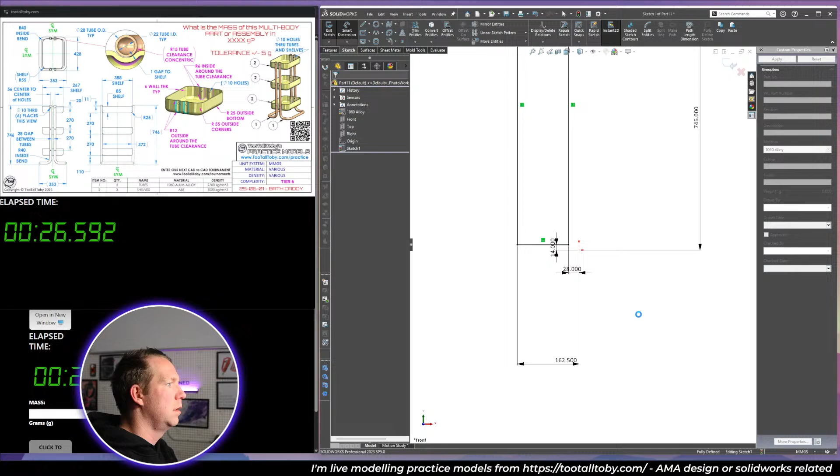Mid-plane 400. Now what's the radius? 54. So we're going outside, outside, inside. Then we're doing a sweep, circular profile, selection manager. That one, the outside is 28. Thin feature of 3. Inside, options, uncheck merge result, hide this body, mirror that body.

And then top plane, shape is 388 by 267, 55 on the outside, extruding up 85, 110 off the bottom, uncheck merge, R25 here, indent here, target body, tool body, cut, gap.

Okay, I want to hide the small ones. I'll isolate this, put my radiuses on. No quick selection there, unfortunately. Shell 6, and then I want to linear pattern going direction top 270, front plane.

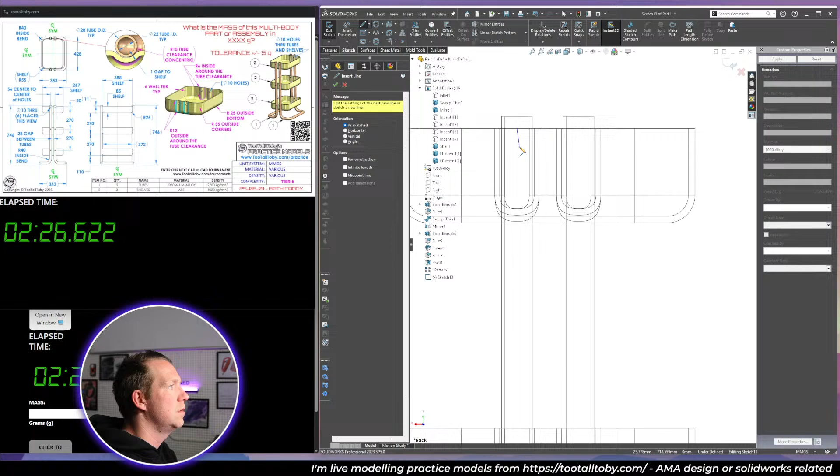Sketch, oh messed that one up, front. Sketch down 20, and then a circle 10 for construction, right plane mirror, pattern this, 3 of those, 270, none of those, flip the direction, extrude cut through all both.

Did it do it? No, it doesn't do it. It says it does it and it doesn't do it. And then materials, so those 2 are alloy, these 3 are ABS. Answer 5973. Almost under 3 minutes.

Thank you. Not quite top, not quite top. Almost out of top 10, but yeah, I'd love to see top SolidWorks is 730.

So even Loto's here, so we'll go number 2 on this board. I'm not surprised at all that Sebastian here, I think, has 2 minutes. He's flying. That was fun. All right, we've got time for a couple more. Thanks guys, appreciate it.

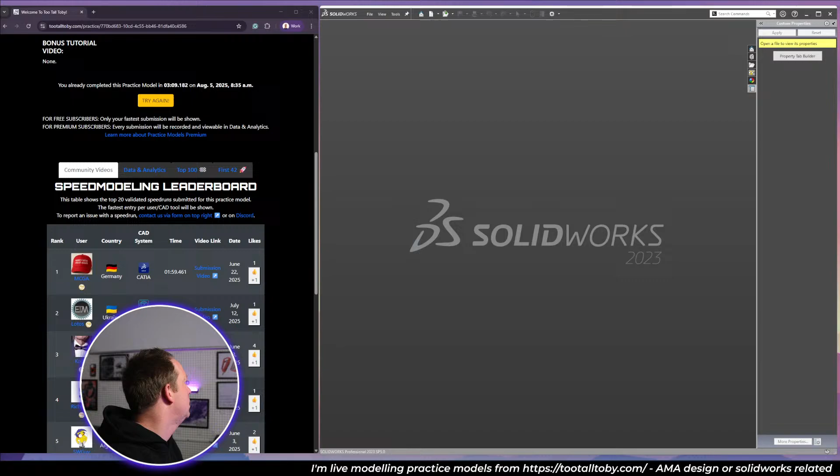Let's see what to do next. Yeah, top SolidWorks here, happy with that. 250702, let's have a look.

What tier is it in the tab? Yeah, what tier? I need to find it. I can search this one, 3D print. Oh yeah, I have seen this one. I haven't done it, only 27 people successfully completed it. And Gray's done it in 26 seconds. I saw some chatter on this one, but I had not had a go.

Blend this corner into a dome-ish shape using whatever technique you prefer. Man, I don't want to look at Gray's video first, I want to try and work it out. It's obviously a shell to finish.

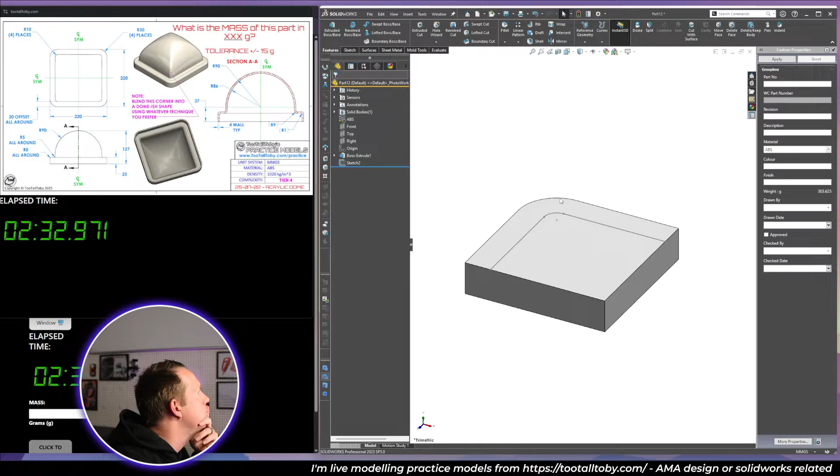There's another way that I want to do this, which is actually doing out a half. So let me just show you what I mean. Not like that, with this. So 220 by 110. And then 30 up.

And this one, don't worry about that. I don't think this is going to work either, but we're giving it a go. It's going to take a little bit of working out. That's fine, it's fine, isn't it?

Oh, it's come straight down. Yeah, okay. You get down here, that's straight. Because that bit there is 37, and it is offset 20.

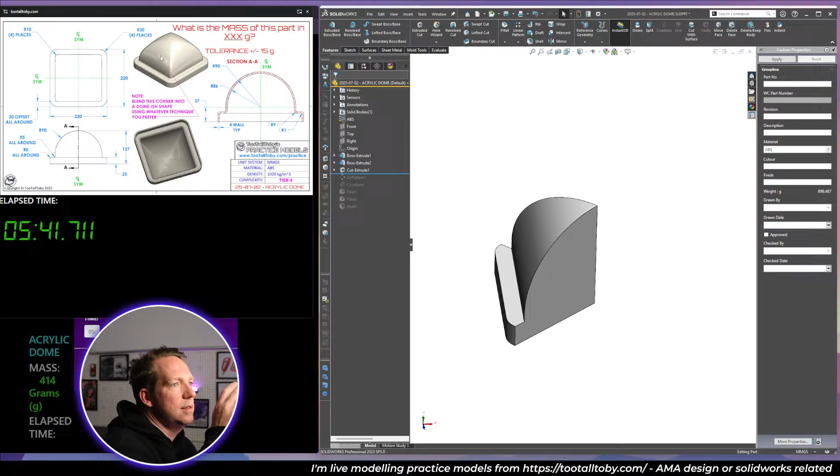Big tolerance, which means you can do it whatever way you want. The way I saw it was if you imagine where those high points are on the shape, that's just one quadrant of it. But instead of doing a top corner, it's the middle section. Pattern it, smooth them off, and we're good. If we could draw this shape quicker that would simplify things. So this is 220.

One way to do it, we'll go into attempt one. I'll show you another way of doing it. On the front plane I'll draw this shape: 110 by 25 by 20. What's this one then? 37 up. It's 12. Radius is 90. Click down, extrude that 220 mid-plane.

Now, can we chamfer it? 110, would that work? You can chamfer that. I want to put a pattern here. I need to get that on my shortcut bar. Customize, features, circular pattern, I want to get this on. It says it's there, put it there. Select this, pattern, body, combine.

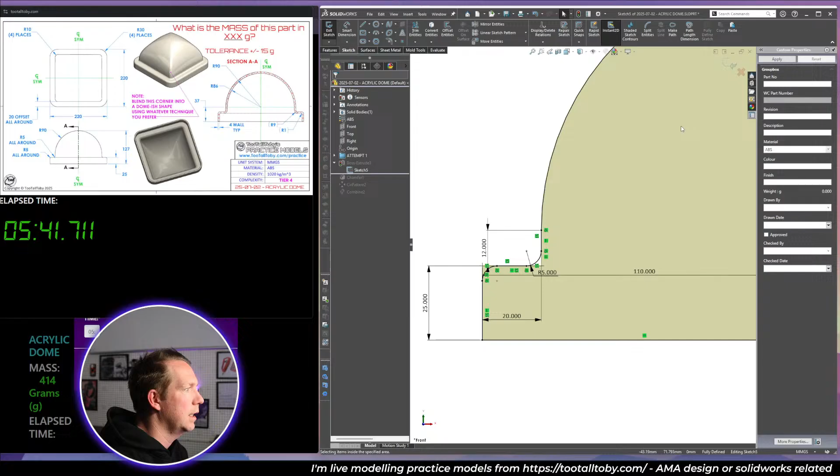Fillets, I've got to put the fillets in. I think this one here, I could put the fillets in at the sketch point like that, and I don't have to do them later. Chamfer, pattern, combine. I'm going to have an issue here, these need to be R30, and I don't want to have to select them all. That's okay, and then 10, like that's okay. Can I get those in before the pattern? Not really. Well, I could do it here. I'd have to do a fillet and turn off tangent propagation, like that. Then it ruins the chamfer. I don't think I can do that.

What do you reckon, which way is quicker, attempt 2 or attempt 1? Now do I have the right answer? I've got to shell it, 4. What is the answer? Hide that one. 414, yep.

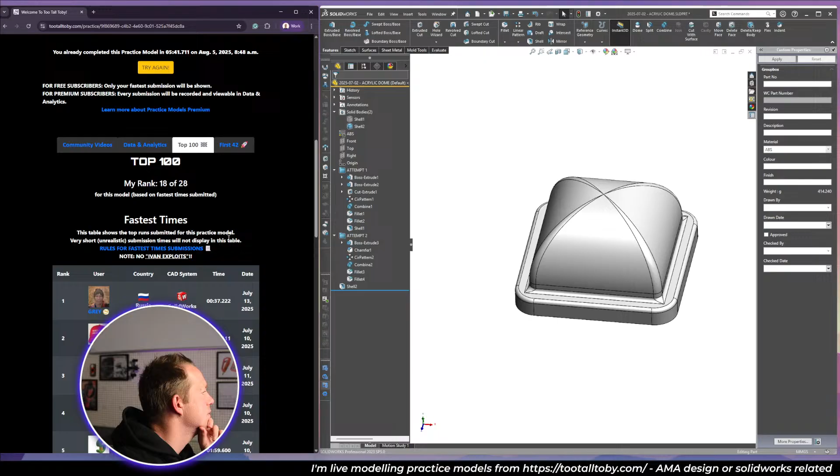Top 100, 37 seconds with grey. We'll get close to a minute.

I'm going to go for option number 2, it's got less features. So: boss, chamfer, pattern, combine, fillet, shell.

Those fillets would be pretty quick to put on afterwards. I think we could potentially get rid of these. All right, remove those. The trouble is if I try putting the fillet on here... chamfer works, that saves me selecting 4 edges. Don't need to do those. I still have to select these, 10, but then this one, clear, 5, shell. That works, that's smoother.

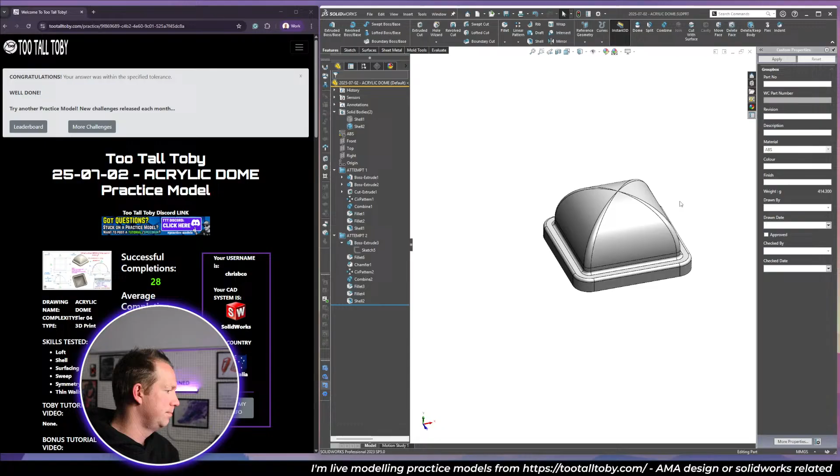Oh, what was the model? ABS. Okay.

All right, here we go, speed attempts: 3, 2, 1, go. Front: 110, 25, 20, 12, radius of 90, straight down, extrude 110, mid-plane.

Then we've got—it didn't do mid-plane. Why does it not do mid-plane? It's got to be 220 mid-plane. Let's start again, cancel, start again.

Three, two, one, let's go. 110, 25, 20, 12, out, 90, straight down, extrude 220 mid-plane. Radiuses of 30, 2 chamfers of 110.

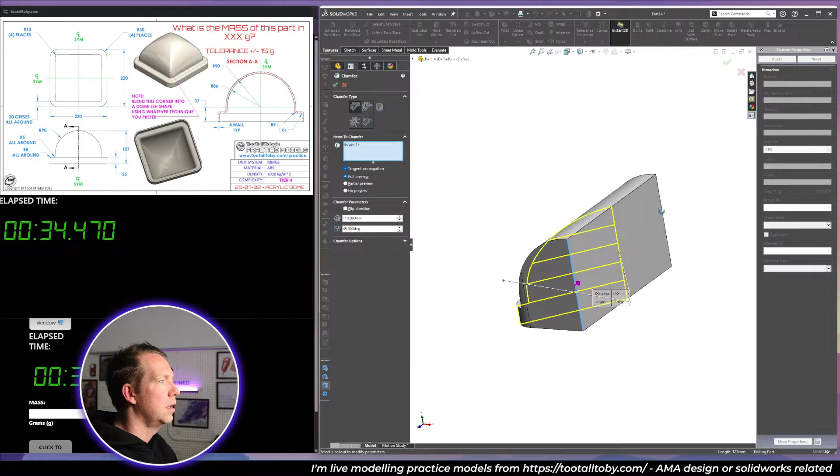Okay, select the body, pattern around the middle, select the body, combine, fillets 10, and then I want a fillet 5, shell 4, answer 414.

Quick, but not quite quick enough. Not as quick as those guys. Excuse me.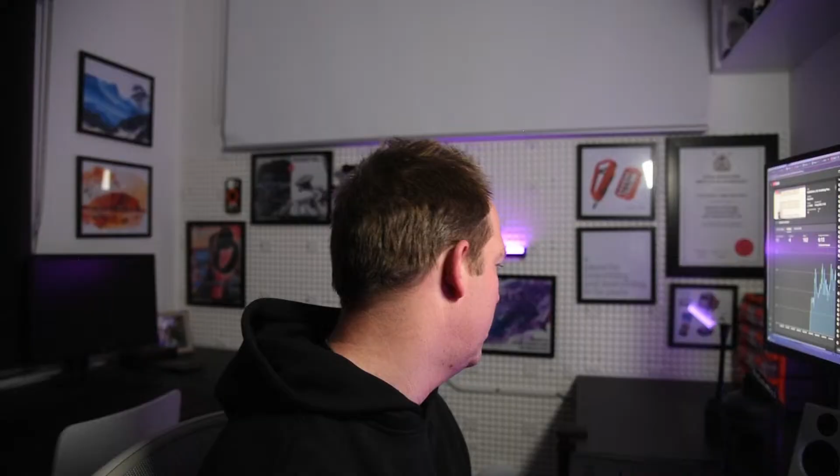So thanks for that. Let's jump into our last model that we'll do.

Good question. I have dabbled, I've done work in AutoCAD. I have spent a little bit of time using some other 3D software, but all up less than a couple of days. I even learned Revit for architecture, did a Revit course. But for 3D modeling, I've always just stayed in SolidWorks and become an expert, gone really deep to understand all the tools really well for modeling for a designer or engineer.

I don't do a lot of simulation work. I don't do really huge assemblies like big plants or really large machinery with thousands of parts. The product design work that I've done a lot of in the past is actually smaller handheld products, so for that, SolidWorks has been perfect.

For those project type stuffs, do less videos. How do you mean? I'm curious what you mean by less videos. Love to know.

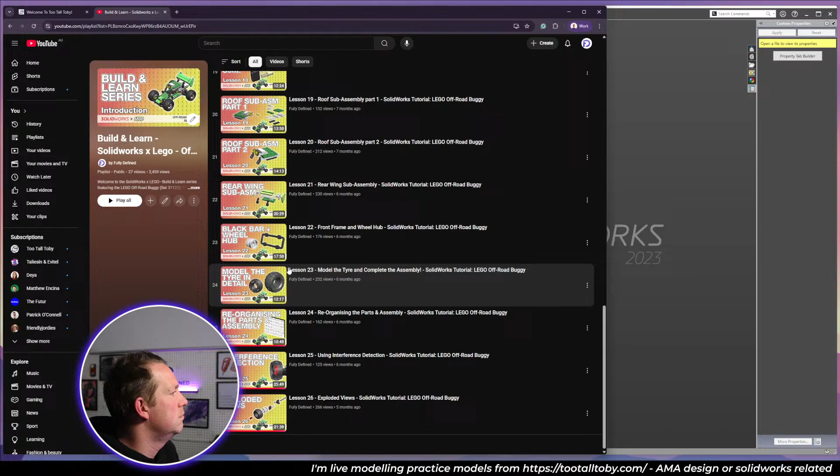Not everyone wants to watch a series of 9 videos or a series of 26 videos. But I guess what I'm doing is recording this and publishing for free, giving really good, I think, projects for people to learn from. At some point, I might monetize elements of this stuff, but for now, for anyone who's here, it's all free, it's all there. So yeah, keen to teach and kind of give back in that way.

All right, let's finish with one of these from 2024. I see quite a few people doing a lot of sheet metal stuff recently. I think I need to give it a go too. So let's get into this one, and this will be the last one. Hopefully it's not too difficult.

Yeah, the hammer model. I took that from Aryan and his SolidWorks channel. That was okay. Yeah, I could do more like that.

Definitely a challenging one here. I'm immediately drawn to do this kind of profile that we can see here from the side view, and then do the tabs after that, the side tabs. Because we can see the dimensions here, flat, down an angle, up. So let's give that a shot.

And we'll use sheet metal tools and try and do it the right way. It was in last year's World Champs. It was not a model for me, and I probably would have lost if I had it, because I'm not quick at sheet metal.

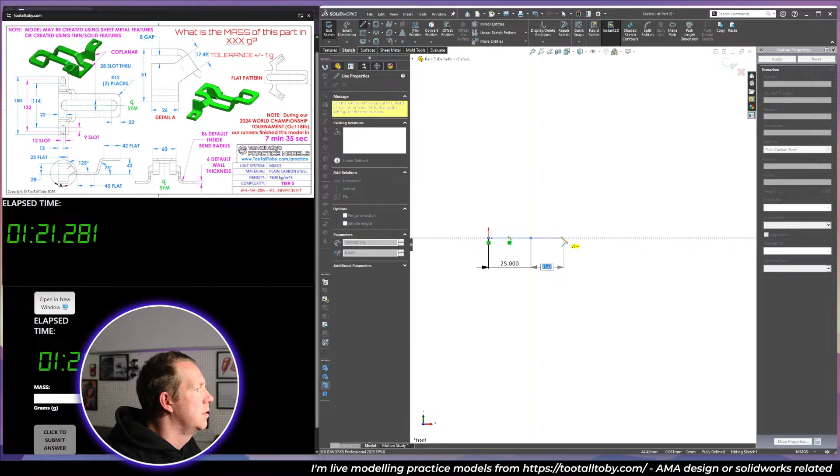All right, front plane. We just need to start from somewhere, so we'll start here with the origin. Go 25. We can do our radius down, radius flat, it's 45, radius up, and then around again. Another flat section, 42. We need to put in some of these, put in some angles.

What else do we put in? The inside bend radius is 6, which would be this one. The thickness is 6, which means the outside is going to be 12.

I'm trying to make a version in SolidWorks, Inventor and Onshape, and struggling to pick one to focus on. I like Onshape, but don't like it being all cloud-based. It's important, if you're doing this as a professional, to choose what your potential employers use. SolidWorks was a pretty safe bet when I started, but now there's a lot more options around. So I don't want to say you should pick one over the other, only that you have a lot of options to choose from.

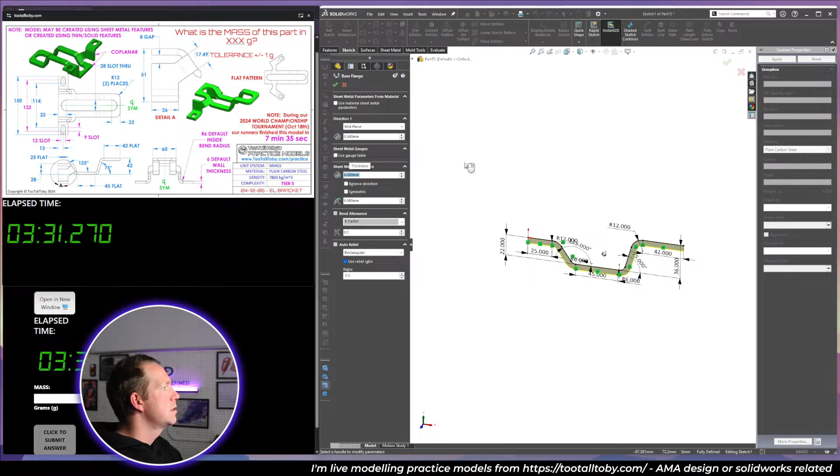Now I'm trying to get my dimensions right here. I have to take off 6 mil for the thickness when I was doing those dimensions. Then I'm going to extrude, go mid-plane. My thickness is going to be 6, and my width is going to be 60.

Then I'm going to go on the top plane and do that slot because I can see it. The slot width is 28, and the length of it, not really worried about. I'm more worried about edge to edge, 22, and edge to edge, 22.

Extruded cut through all, both normal cut. Got that detail, all right. Now there's a couple of fillets on those edges, which is R12. We can put those in, so use a break corner for that and just select that face. I'll take off those radiuses.

Now we've got a tab, which is here, so we can do edge flange. This bit is really tricky, but if we just bend it down a little bit and use the bend, it looks like it's just coming straight off. So if I just bend it down like that, but this could be okay here. And then on this face, I actually draw in the rest of the shape. This could work quite well.

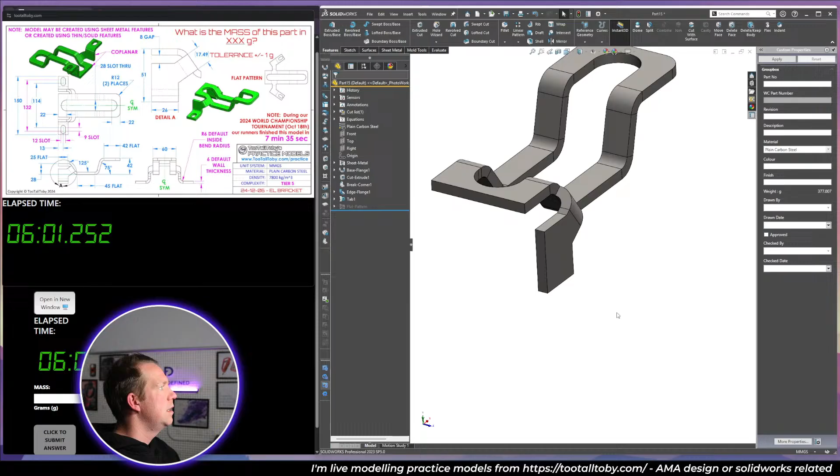Merge, and then there is another edge flange. This edge flange is inside. And what's the width? It's coming out 150. So from my front plane to here, needs to be another 14 millimeters.

Okay, and then we've got a slot in that face, which is a 9 by 12. From there to there, 132 divided by 2, and it's in the middle. Cut. Yeah, cut like that, it's fine.

Now, if we've done that right, then we can go here, edge flange tab, edge flange cut, front plane, mirror, okay. And that'll work for us, and that'll do everything. And if we've done it correctly, the answer is going to be 488. Oh, big relief on that.

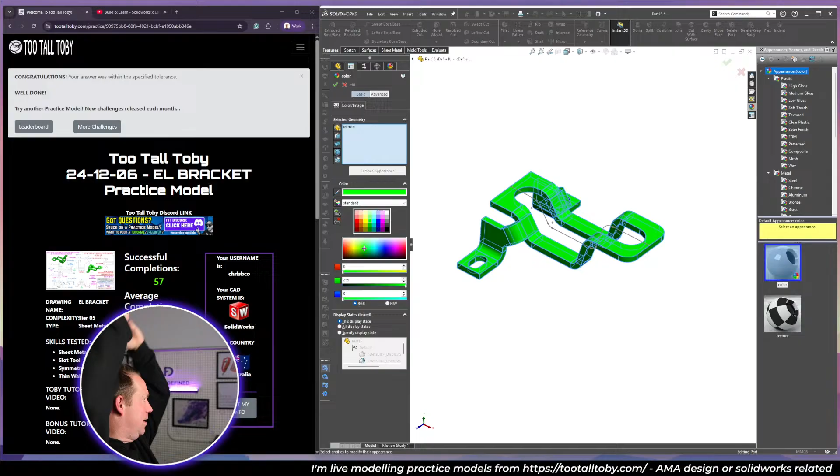Thank you, Guntus. Yeah, I am working on, I guess, improving this. The live stream is an experiment. This is the 4th live stream practice model session I've done, so still getting the hang of things. It might take me a little while before I feel super comfortable doing it, as you can imagine. So far, going okay.

I'm not specifically trying to make it live for everyone in the middle of the day. I'm just doing it at a time that suits me, which is when my kids are asleep and there's nothing else to do in the house.

Okay, this model looks pretty good. Let's save it. Got time - that went quicker. Well, I should do a speed run now, shouldn't I?

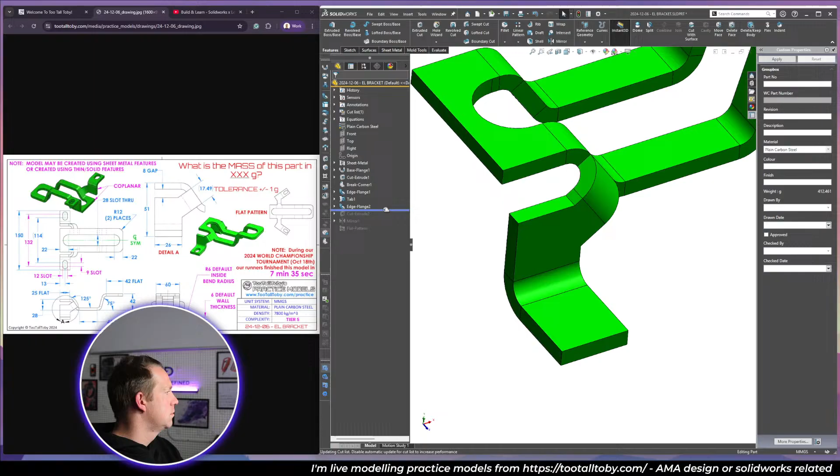Thanks, Gummy, appreciate that comment. I think that's the aim with the Lego models - that was one of the questions. I'm doing it in SolidWorks. Are people happy to learn from someone doing it in SolidWorks, or do they want it more generic? A lot of the tools are similar from software to software, it's just the interface and some of the process that's different.

Could we do this any quicker? Could we do it quicker if it was just a solid model without sheet metal? Don't think so, I think the sheet metal is actually pretty quick.

I think getting this dimension right the first time would speed things up, particularly the fillets.

Let me just screenshot that one and use that as a guide.

Okay, so 60, slot width 28, 22, 22. Front corners 12. Edge flange just right off the bat, 30, do this shape. Another edge flange - that edge flange goes out 39. Cut, mirror. All right, let's give it a go.

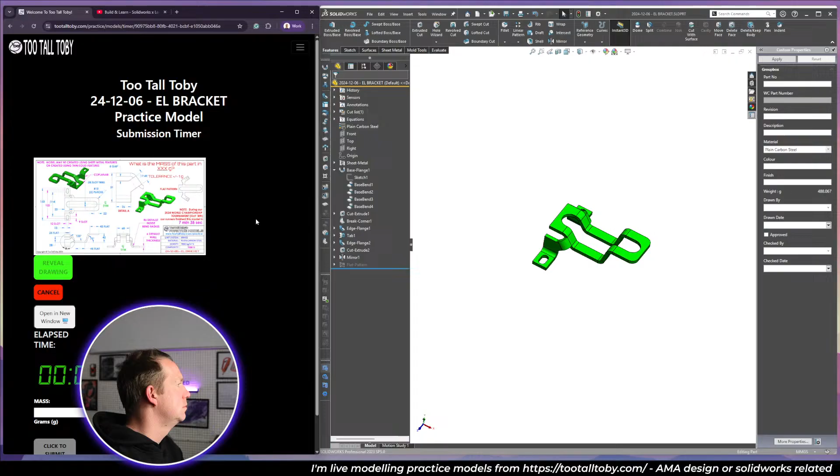Speed model attempt. Let's aim for 2 minutes. Now the type is plain carbon steel. Whoops. Start a new file, plain carbon steel. And 3, 2, 1, let's go.

So front plane, sketch out 25, down radius of 12, and then click. Straight line, radius of 6. Click, 45. Radius 6, up. Radius 12. Click. 42. All right, we just want to add some tangent relations where we miss them.

Add some dimensions - 22 for that one and 36. This one 75, this one 125. Okay, sheet metal.

6, direction midplane, 60. Okay, slot.

I'm going to go long way out 28. Delete this one, get it in line with the origin. Put our dimensions in, 22, 22. Extrude cut through or both, normal cut. I don't know why it says through or both and doesn't want to do it automatically.

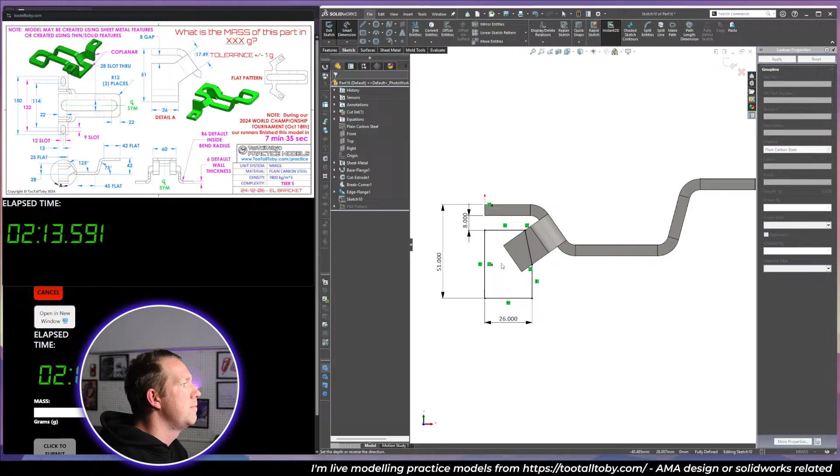That's a tab. And then we need edge flange - this is included, and this is 39. And then a slot here, which was up 9 by 12. Midpoint, vertical, outside, the middle, 132 divided by 2.

Extrude cut. Okay, and then we're grabbing all of those and mirroring. And if we've got it right - 488, under 3 minutes.

Shortcut for through or both cut - right click and press H. So if I draw a circle, I go right click, H. No, do I have to do extrude cut? H. Don't know, I should look into that.

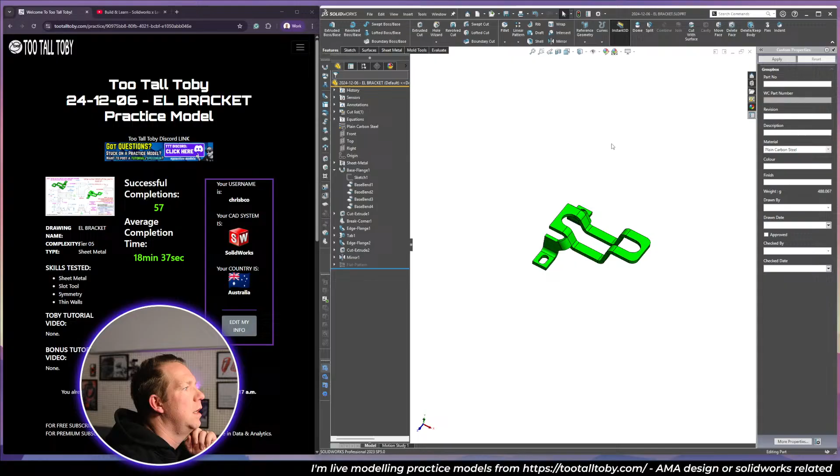All right, how many models have we done today? We've done that one, we've done the bath caddy, we've done this shut-off piece. What else have we done? Table, garden bench. We also did the wall plate, also did - we started with an option of the cube, did that one as well without a recording. So, 7 models. Not a bad session.